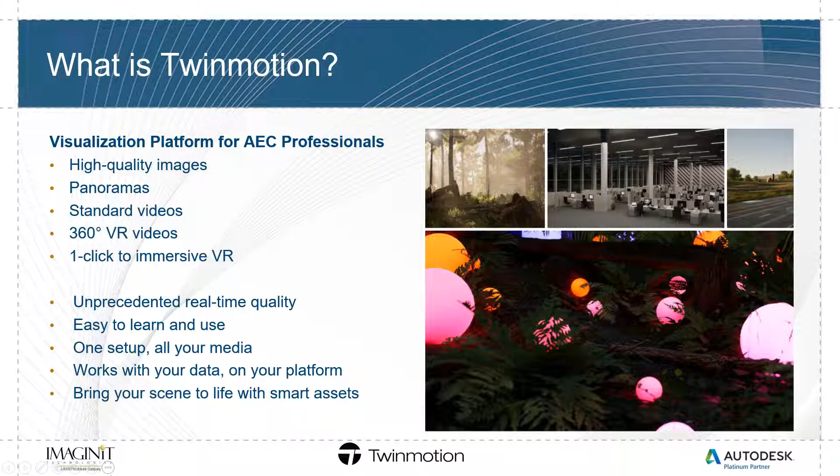The asset library already in Twinmotion is relatively substantial, but you're not limited to just the ones included. You can import and expand the library with a variety of other web-based resources to fulfill your asset needs. Finally, Twinmotion is actually quite fun to use. Once you start getting into it, you'll find yourself experimenting with a lot of different features because of how easy it is to use. So once I get into it, you'll see what I'm talking about. Since we have an open mic, please stop me at any time, and we have the time to make this more interactive as a demonstration.

Before I actually start doing the demonstration, let me show you a quick video that our team put together that encapsulates a lot of the features packed inside of Twinmotion.

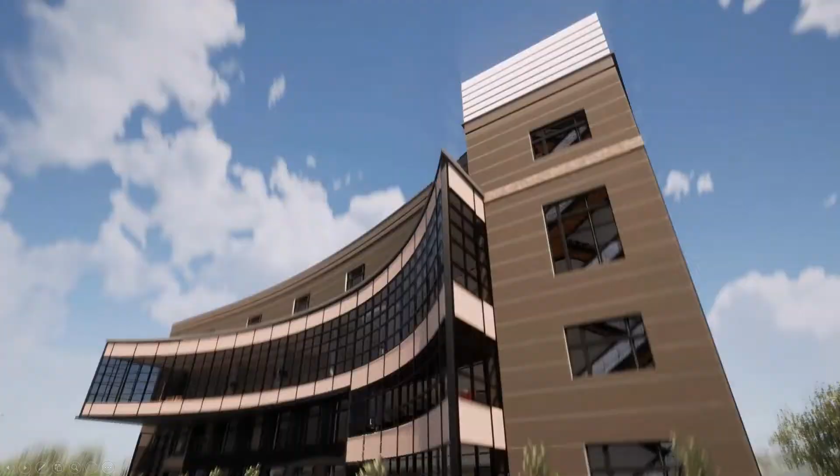This is the data set I'm going to use as a backdrop for the presentation. Again, very easy to use. We can have animated characters here; there's an extensive library of characters, not just people, but animals and a variety of other animated features. Camera capabilities are pretty standard, with panning and zooming. We have time of day settings where we can go from day to night, and there are a lot of lighting features here—you can see in a parking lot and around the building, with many lighting objects included in the package.

Some of the fun things you can see here: as we pan, we have what's called the northing offset, so you can change the northing offset and animate the moon and sun going across the sky. As we translate and move into the interior of the building, you'll see other features like particle animation—you can add smoke to this burning laptop. There's also water, character paths so we can add paths for not only characters but vehicles and custom paths, and we can integrate videos within the video—another neat feature.

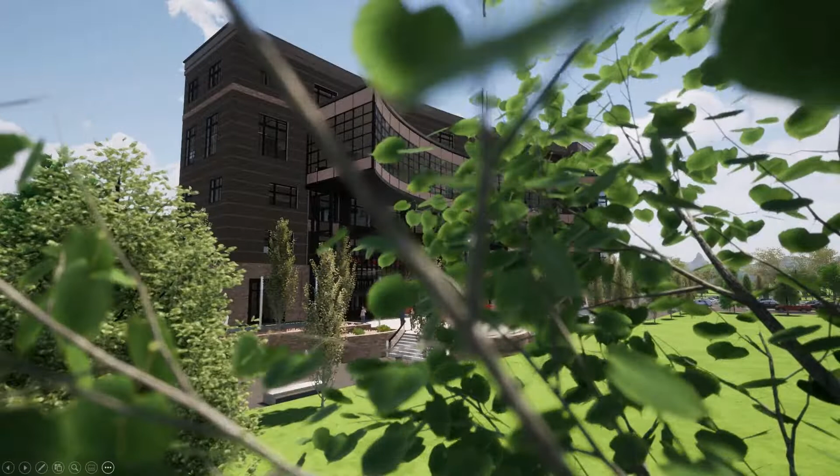And there are camera features here too, like depth of field, where we can change the focal point, open up the iris, and focus in on different things. And then, as I talked about earlier, there's vehicle paths. You can create your own custom paths and change the seasons from summer, to fall, to winter.

We can also adjust weather from a stormy, rainy day to a snowy blizzard day. As things get snowy, cars accumulate snow, and we can show the age and growth of plants and such on the site.

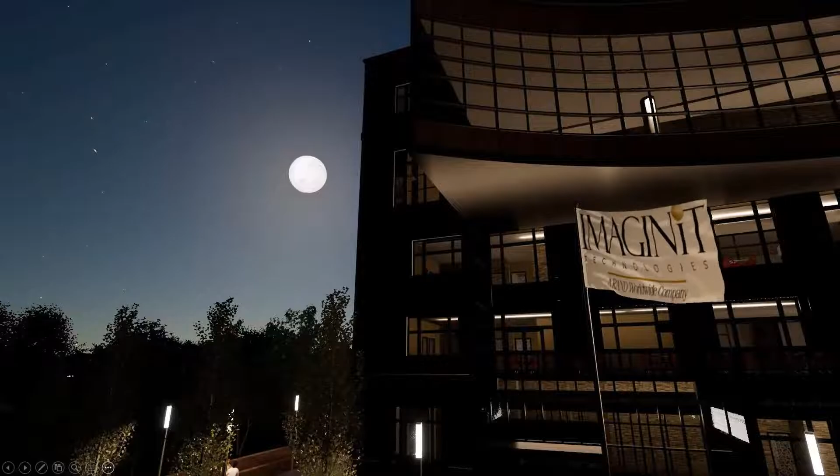Night scenes again have some more characters in there with flying birds, plus nighttime scenes with lights. So again, this just gives you a broad stroke view of what we can do inside of Twinmotion.

So let me get out of this PowerPoint for a moment, and let's start from the beginning of opening up a Revit file. This is a Revit users group, so you're all familiar with Revit. I have the model we're using as the backdrop for the Twinmotion presentation.

Again, you get to see it's a pretty basic model here. It's fairly well vetted out with interior information, building skin, and a little bit of a simple site.

But the way we were able to extract this data out of Revit and bring it into Twinmotion is using a plugin from Twinmotion. If you look at your tabs at the top, there's a Twinmotion plugin for the various versions. I happen to be using 2020. I don't know how far back they go, maybe 18, 19, 20, and then there's a 21 version of the plugin.

But it's a very simple interface, with three panel buttons. There's a 'See in Twinmotion' option, which is basically a direct link to Twinmotion, so I can quickly take this model and export it right into Twinmotion very quickly.

The difference between that and doing a hard export to an FBX file, which is this button here, is that it's a one-directional way of looking at your model and vetting it out inside Twinmotion to get a sense of what your model might look like.

So what I mean is I can be in Revit, export out into See in Twinmotion, look at the model and various views inside Twinmotion, make some adjustments back in Revit, and then re-export it back to Twinmotion. The only thing is that it's not a bi-directional change.

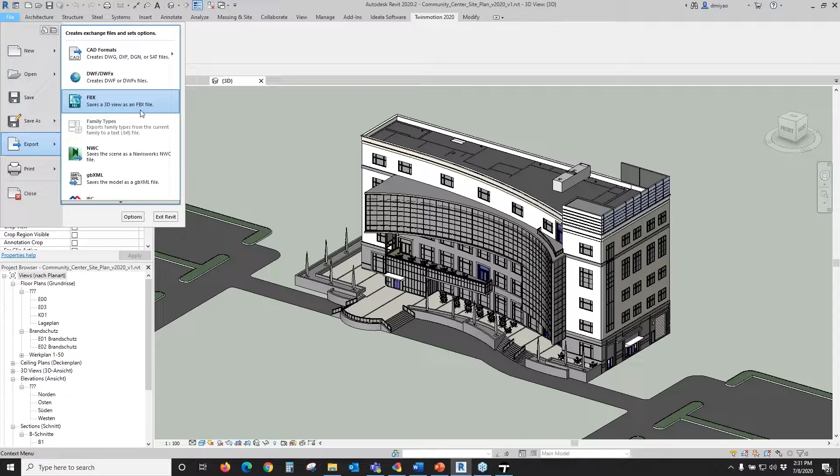If you're wanting to add certain assets, objects and materials, you can bring those in via FBX, and that's probably the cleanest method. Out of Revit, you can do a quick export to FBX, but it doesn't give you the broad spectrum of what you can do with the true export from the Twinmotion plugin. You can bring that FBX file right out of Revit into Twinmotion. It will behave similarly to the export out of Twinmotion, but it's just not as rich. To answer your question, yes, you can bring any FBX file into Twinmotion.

Upon deployment of Twinmotion, you're presented with this welcome screen. It gives you a quick overview of how to navigate around Twinmotion. You can change your navigation mode to mimic other applications, like the Revit interface, if you prefer, or just keep it at Twinmotion. There's also a link right here to the Twinmotion Epic Games website so you can download those plugins.

I'd caution about getting rid of this welcome screen, because if you set it to Revit navigation and then wanted to go back to Twinmotion, if you kill this box, I think you have to reinstall the program. It's a little annoying, but just a tip there. So let's move that out of the way.

I'm sorry, this is Jason Harwell. I don't mean to interrupt. Can you repeat that last little part there?

Yeah, about setting the controls for SketchUp versus Twinmotion. On the welcome screen, there's the ability to change your navigation mode to mimic Revit or SketchUp or whatever it might be. But if you kill the box and say you don't want it to pop up anymore, it'll stick on that format. It's not a game changer, but if you prefer to go back to the other navigation mode, you're kind of stuck there. You'd probably have to reinstall the program. You can't adjust that from preferences anywhere that I've found. I could be mistaken, but I'll shelve that for now. There's probably a way around it, but I generally just keep that there and quickly X out of it.

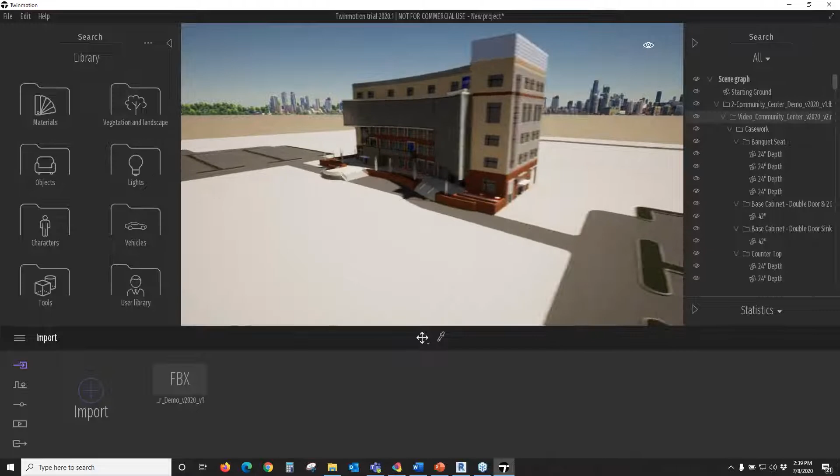If you look at it here, it's relatively raw - there's not a whole lot going on. The materials are pretty poor, but we'll get into those in just a minute. Navigating around the model is quite simple: I'm just holding my middle mouse button to pan around, I can use my wheel to zoom in, I can hold shift and orbit around things. And again, I can zoom in, or hit my arrow and start walking inside the model here a little bit and going around things.

And like I say, I actually wanted to go to a specific area in this model, but I could try to navigate through this and try to find it. But again, the easiest way for me to do this is to use my scene graph. I know there's a billiards table I want to go to, so if I just use my search, type in 'bill', select that, and hit my F key, it takes me right to that location. Pretty easy - I really like this scene graph because it allows me to navigate around my model quite easily.

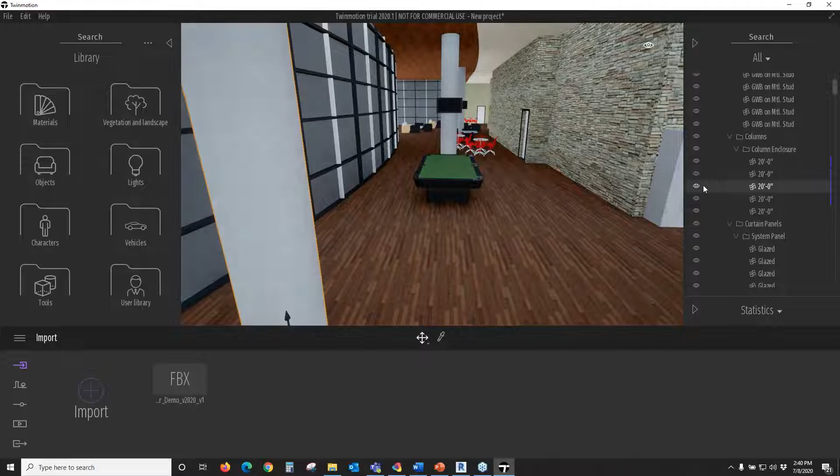That's awesome. Yeah, it's very easy to use. You don't even really need to know what the object is. If I just click on it, it'll tell me inside my scene graph that it's this 20-foot column, and I can turn that off right here. So again, it's just like object styles or layers. You can turn things on and off, but it's also a quick way to navigate inside your model, move to certain things.

So that kind of scene graph you were calling it, does that work in a hierarchy, and where's it pulling that information? Is it the Revit category, Revit type, and then family, and then instance? Yes. So these are all the various levels, and it's working exactly the same as Navisworks.

It's good and bad in that it's very deep because there's a lot of stuff in here. But the good news is that I can search, or I can look at things by various categories here, and I'll show you this as we go deeper into the demo. It doesn't matter where I'm at in my scene graph, I can always find stuff. Yeah, the search is critical and great. Oh yeah, thank you, this is wonderful, I'm using it all the time.

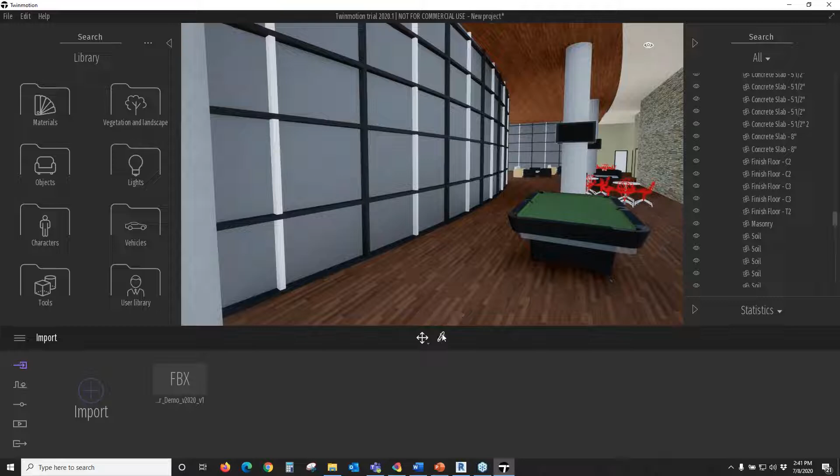So I'm inside the scene here, and one of the first things I want to do is show you how to manipulate and change materials. You can see that the materials brought in from Revit are okay, not terrible, but I'd like to change them, especially this window. If I hit my little eyedropper here, it's my material picker, and I click on it, it tells me it's this glass, cast gray, and tells me certain parameters about it. I can change its color, its reflectivity, its scale, and so on. But I don't want that, so I'm going to go to my materials library and select a different kind of glass.

This is the default library that comes inside of Twinmotion. Again, you're not married to this, you can add to it and manipulate any one of these materials on your own. Out of the box it's quite extensive and pretty deep. You can see all the various glass types in here, a lot have little bump maps on them, and some are shaded. I'm going to try to find this tinted, dark tinted glass.

I'm going to select that one and drag it on top of that material. So it's that easy to change that material from gray to something better - now it's an actual glass. Now that it's on my windows, I have control over changing it, so maybe I want it a little darker and more opaque. There's certain options here - this weather one is kind of cool, it'll show raindrops on your window if you have weather on. I'll show you weather when we go outside later. So again, very easy to add materials to the window.

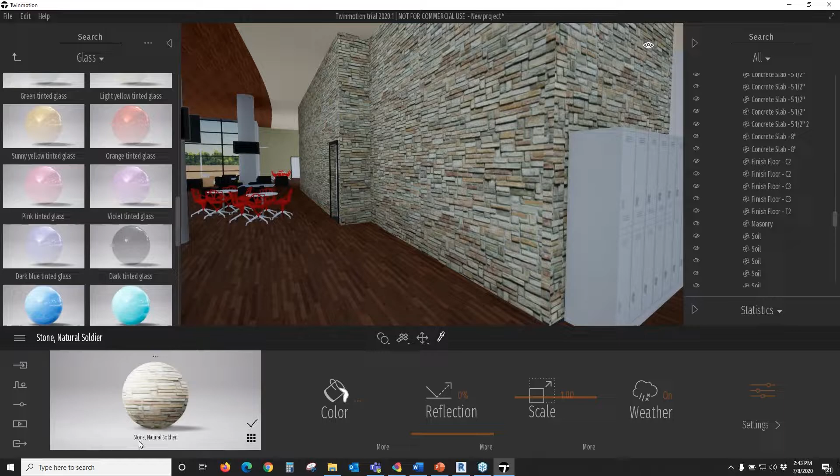If I pan over to this wall here, again this is the Revit material that was applied. It's not terribly bad, but I think we can do better - you can see it's pretty flat, it doesn't show any kind of bumping material. So let's change that. Let me use my material picker again, select the material, and it tells me it's this stone, natural soldier. Let me go back and find a different stone.

Again, pretty extensive library of stuff here. Maybe this one - I'll drag that on, so I put that stone on here. If you look at it, it's a little nicer now, you can see the relief in the grout from the stone. You can change the scale, make it bigger or smaller. Quite simple - just dragging that material onto that surface makes it that easy.

One of the things I really like about Twinmotion is that I can isolate the application of the material, even though this is one common wall type. I know a lot of times you're stuck applying a material to a certain wall type because it is categorized by that.

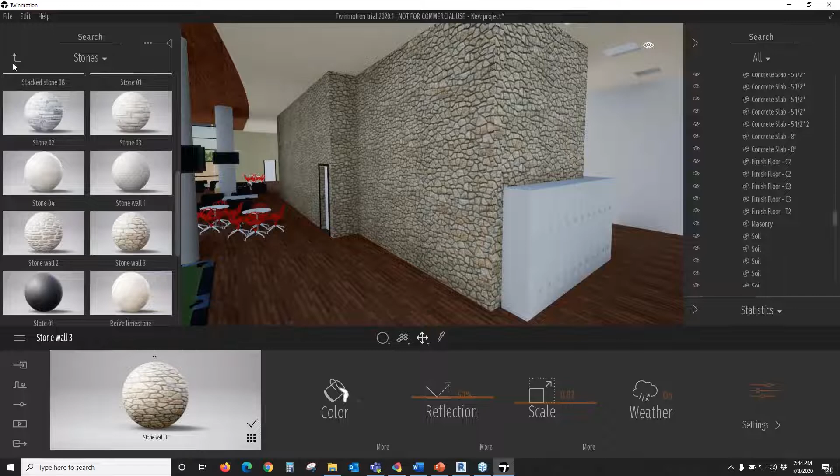I can isolate a piece of that wall by using apply to object. So if I want to change a piece of that wall to something else, let me find a different wall covering, maybe this plaster coating. I can just drag it onto that one wall now, so it's not changing the material for all objects of the same type. I can isolate that one wall and place that material just on this one wall here.

I find that to be quite useful because I know previously on other apps, you're always having to change its layer, its object style, and it becomes a little bit annoying to isolate certain things, when it's just easy right here. I can just pick that object and change it, making it different than the rest.

Pretty easy here. Some of the other things we can do with materials inside of Twinmotion: you can manipulate its color, maybe make it a little darker, change its reflectivity, adjust its scale, make it a little bigger, and the bump map.

But one of the fun things Twinmotion provides is this concept of grunge. If I go to more, you can see this grunge tool here. As I move the grunge up, you start seeing that the material begins to weather or look a little older, adding more realism by showing what it might look like in 10 years.

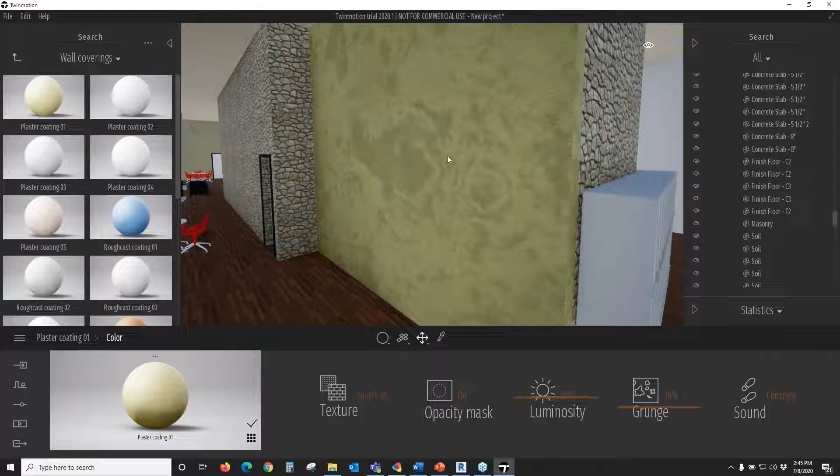These are the kinds of things you can animate too, so you can show how this might look in X amount of years, the weathering of this particular material. It's just a neat, fun tool to have for your materials.

So now that we have some materials applied, you kind of get the idea there. It's pretty simple, and I can start building out this environment a little bit deeper.

So if I go into my library... it looks like it wrapped around the corner a little bit. Is that something you can control?

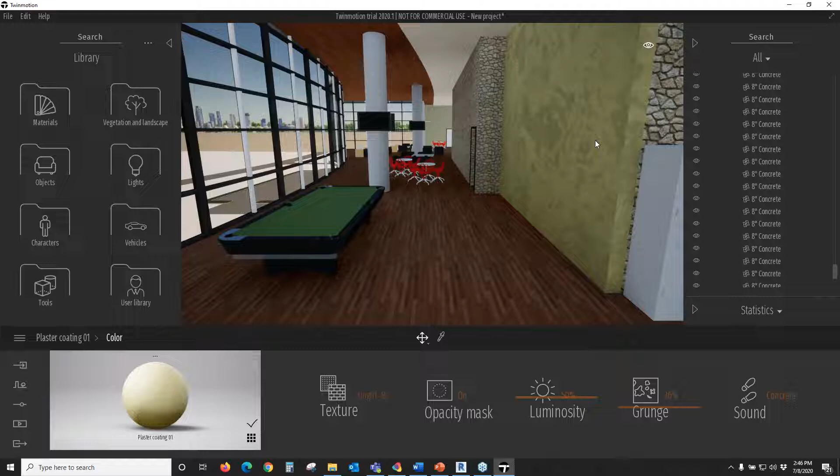Right here, this corner here. Well, it just happens to be the extent of that object, it's kind of a thick object. I could put the same material on this wall and it will blend. Is that what you're asking? I can't control it directly; it depends on the way the object is joined in Revit, like if you did a miter join there. Right, so this happens to be just a butt joint, so it's based on the geometry. You're correct.

Can you talk a little bit about the opacity mask feature, you don't necessarily have to demo it, just talk about how it works? What we'd see is another image mapped on top of it that we can set the opacity of. Yeah, absolutely, and I can show you there are other tools where you can set the sort order and place things on top of one another, I'll show you that in just a minute. But before that, I just want to build this scene out a bit further.

So if we go back to the library, I talked about characters. There's a fairly extensive character library here: animated humans, groups of people, posed humans which are basically like RPC people that are two-dimensional, and we have animals and some cutouts as well. In the animated human library, there's a plethora of different people you can select and choose.

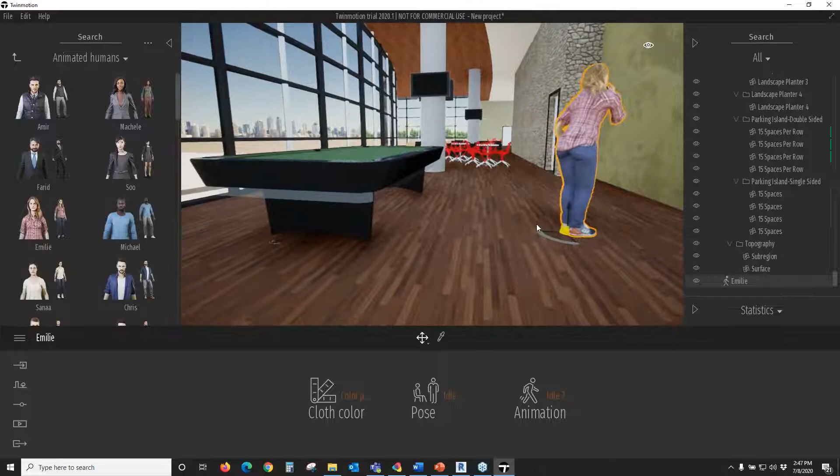If I want to build out my scene, I just grab Emilie here and drop her into the scene. When she's in the scene, you have this little gizmo attached to her so I can grab her and rotate her around, maybe move her over a little bit. They're animated too, so I can change her from idle to maybe drinking, maybe phoning, something like that. There's a variety of things you can do with each of these people, and they're all kind of random.

So I'm going to leave Emilie here for now. Move her out of the way.

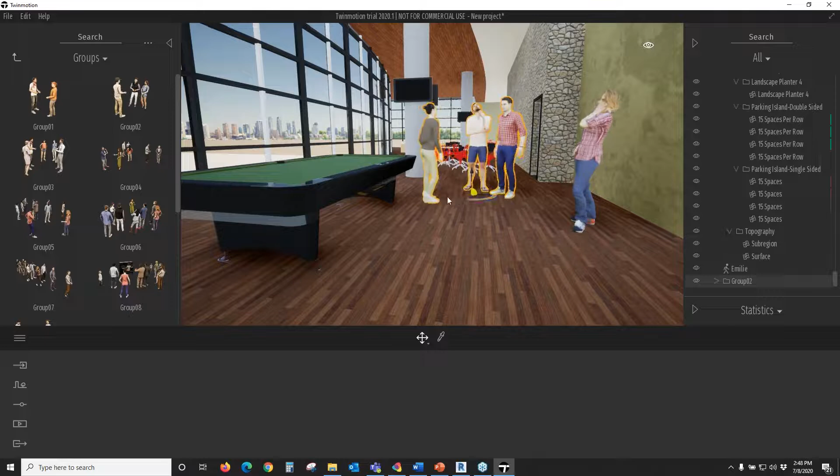Not only can you have individuals, you can start populating with a variety of different individual people here. I can put in groups of people as well. If I grab this group of 3 and drag them in, I'll place that group here, maybe rotate them a little bit. So you can see I have this group of 3. If I grab another group of 3 and place them here, you can see it randomizes it—it's not the same group of 3. That's a nice feature, because you don't want the same group of 3 people in your scene all the time. Every time you grab a variety of these groups, it randomizes them and puts a bunch of different people in your scene for you. So it's pretty simple to build out your scene by grabbing these various groups and people.

Not only do you have people, but we have animals. I like Felix because I'm a cat person, so I'm going to put Felix underneath the pool table. We've got dogs and chickens and all kinds of crazy stuff out here. Put a dog in here—maybe there's an office dog. Move him out of the way.

Again, like I said earlier, the product is very fun to use. There are a lot of interesting things you can do to build out your scene. There are butterflies—I showed you in the video. There are birds flying in the sky. There are fish you can add to a pond or water if you need to. So a lot of fun features here.

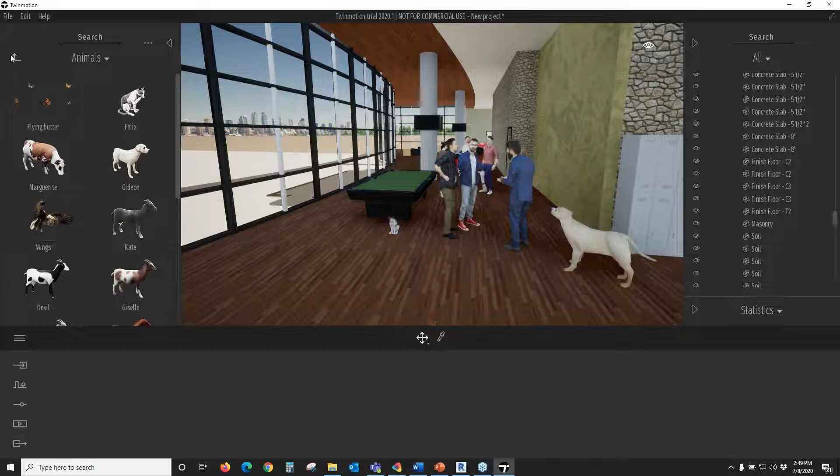I talked earlier about how you can kind of mask things on one another. Twinmotion has these decals, and I'll show you how to do some of these things outside, but I'll grab some fun ones here. Maybe I'll put this hopscotch decal on the floor here. Just like a material, I can change its size, I can change its opacity—maybe you can see through it. There are things you can do about that. This sort order will come in handy when I put something outside; it's basically about laying one on top of another, so you can sort them by priority.

I can also grab maybe this graffiti here. Again, as I'm hovering over any of these surfaces, you can see that it places it out there for you. A question about the decals?

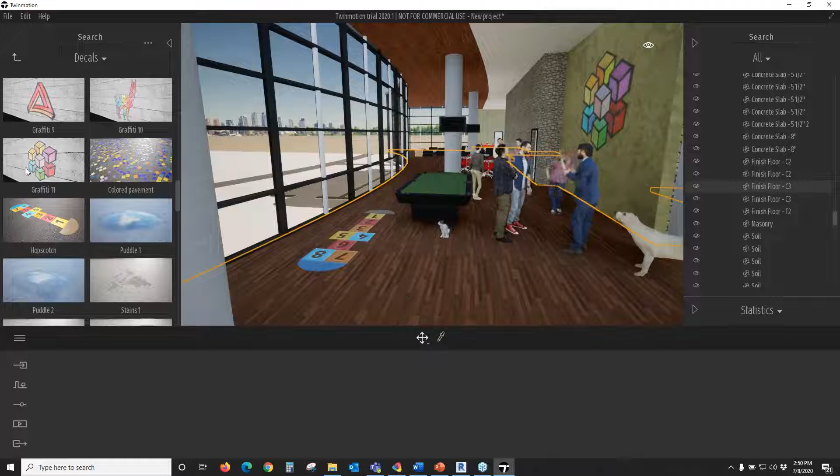Do those only apply to flat surfaces? Nope, I can put it around that round column. It kind of truncates it a little bit, but it doesn't have to be flat. Yeah, it does a little strange thing here—it didn't really wrap it, it just kind of placed it on the base of that round surface. It looks like it's on a per-polygon or per-face basis. Yeah, it's kind of a yes/no answer.

So decals are very handy because rather than building out a lot of geometry—I'll show you in a parking lot—you can do the parking striping. You could do that in Revit, or you can do it here as well. It really depends on how you want to manage your model and how you want to animate that. So decals are pretty simple: just like any other object or material, you can control them, changing its opacity. You can layer them on top of one another, and you can change its sort order.

Do all of these things you're adding, like decals and character animations, show up in your search, or what did you call this thing on the right here? Yeah, so if I go to decals, as I place them out there, it'll tell me I can now manipulate my hopscotch. So anything I add as an asset to my scene gets added to my scene graph, and this is how I can actually turn these things off—it can be placed there, but I can turn it off and on. So it's easy to manage those objects inside Twinmotion.

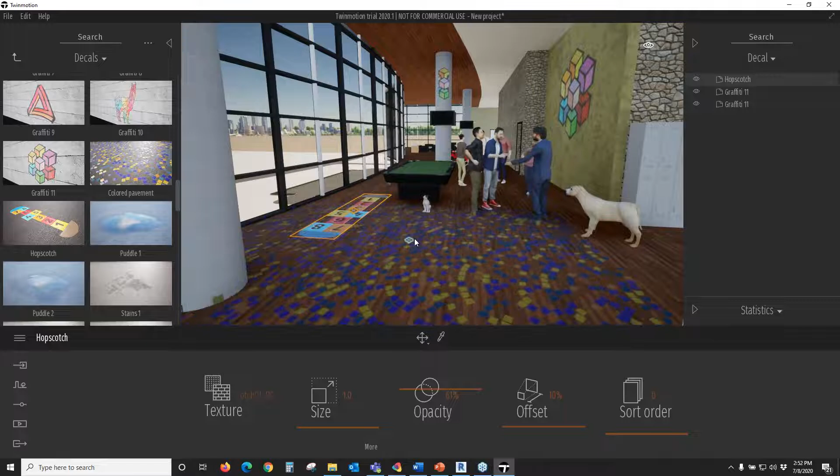How do we adjust the stacking order of those decals again? So in this hopscotch, there's a sort order. I'll show you when I go outside. I'm going to place some things outside, and I'll show you how that lays on top of one another. I'm going to grab this funky colored pavement. You can see that it's below the hopscotch decal, but if I change its sort order to 1, it moves on top. So you can change that sort order.

Oh shoot, I didn't mean to do that. Deleted my floor. Maybe it's better to do it here. Delete. See how easy that scene graph comes in handy? And by the way, there is an undo, so you can undo if you did something by mistake, like I did by deleting the floor. How many steps of undo do we get by default, and can that be changed? I think it's to your last save. So if I save this now, it's going to refresh it all.

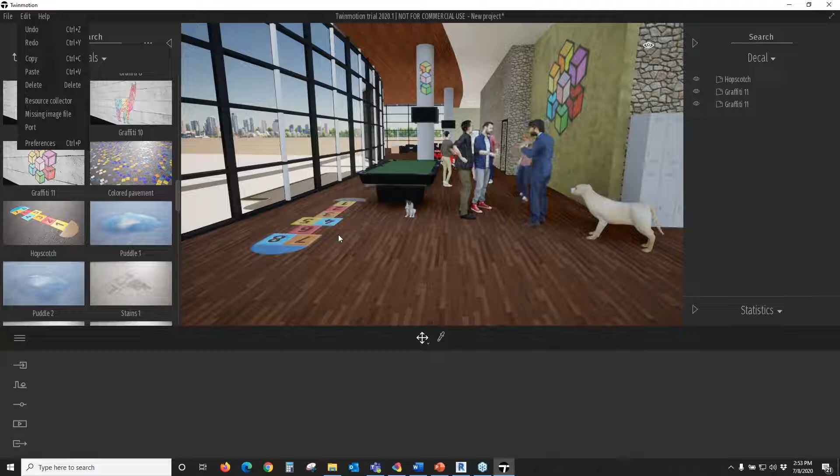Okay, so moving along here. So we have objects, we have decals, we have people, we have animals. We can also add other things here. Let's go to, maybe I can put a laptop out here. In the video you saw that. So we have a laptop here.

There are things like I showed you in the video that are particles. So there's a variety of different things here. There's fire and smoke. You can put this smoke on this laptop so it's kind of burning. So there's a lot of particle kind of animations. There's water, there's colored smoke.

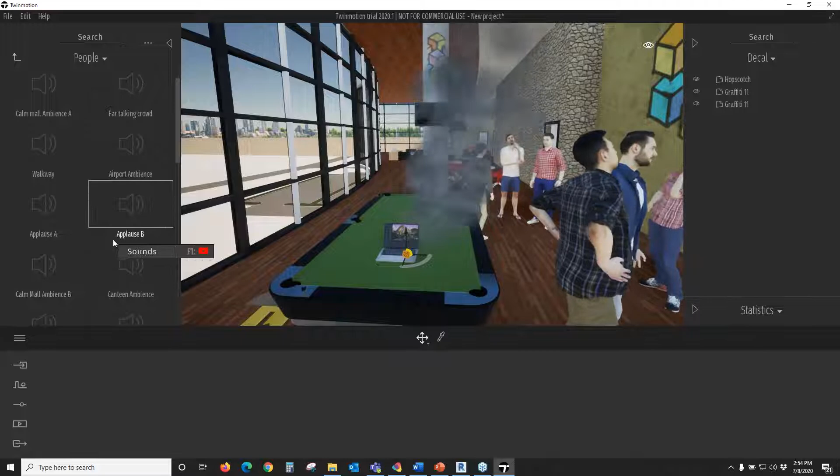Additionally, there's sound. So you can add people sound. You can't hear it here, but you can add certain kinds of sound, noises like these people are kind of conversing, so sort of like white noise in the background. So you can add a lot of texture to your presentation. That smoke is a particle, so that's a little annoying for me right now, so I'm just going to go ahead and turn it off.

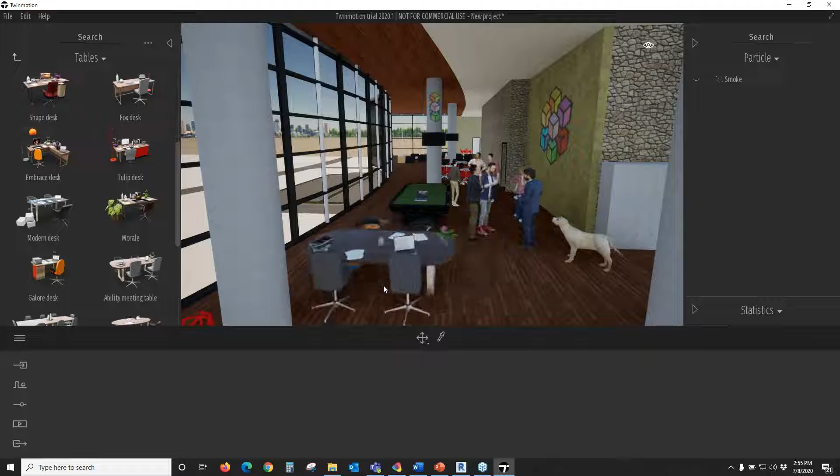Going back to some of the other objects that we can add in here. Let me go to Office and maybe some tables. So I can grab this table, I can bring it in. Again, it's very easy, it's just drag and drop into your scene, very simple.

Maybe I want to add a chair. So I grab this chair, drag it in here. In order for me to copy something, I have the gizmo again, I can rotate, move it to make a copy. I could certainly drop another chair in here, but I can copy this by holding my shift key down and dragging over. So now I have an instance or a copy of it.

Some of the other things that you can do with these objects is you can move things, you can scale, you can rotate by using these commands here rather than the gizmo. Additionally, there are things if you need to do something very precise, you can transform things.

So if I click, let me get out of this and go to all. So if I click on this chair, there are certain things about its position that it's telling me. If I wanted to precisely move something about this chair, maybe move that to 17, you can start nudging the object a little bit more precisely than eyeballing it, if that makes sense. So you have the ability to do some precision transforming of objects inside your model by using these tools here. Again, you can rotate and scale it here, they are the same features as here, and you can tumble through these by hitting your tab key. So if I'm hitting my tab key, I can tumble through these commands here.

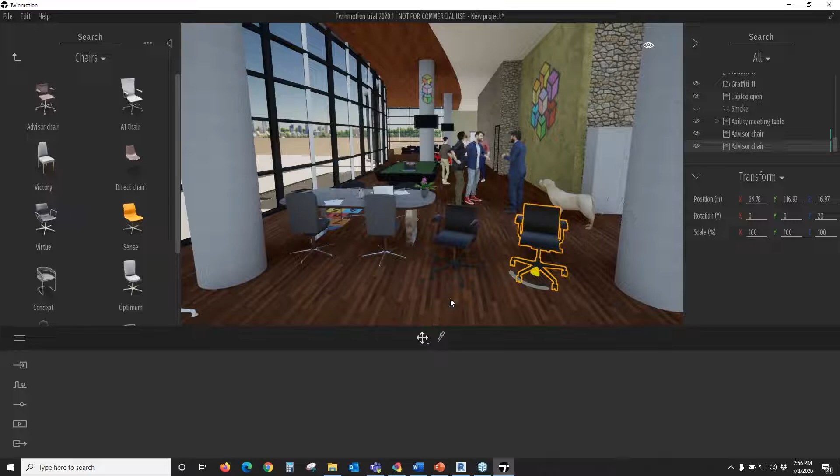Pretty simple there. Let's move on to some other things inside of Twinmotion. We have lighting. So in lighting, these are all these IES light types. Again, you can add whatever additional light types that you want, but I'm going to just grab one of these, maybe this one. So I'm going to just put it up here. And once it's placed, you have the ability to change its angle. Maybe I want it to be a little more focused, change its attenuation.

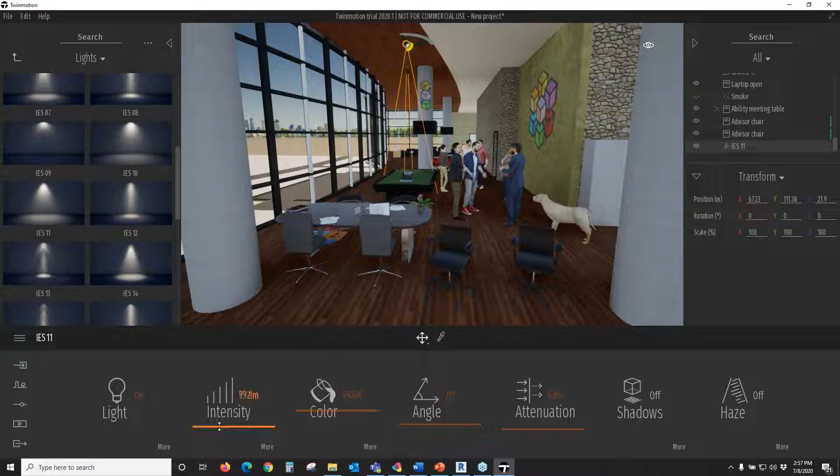Something like that, I don't know. Let me change its intensity and move this a little bit over here so it's on the pool table. You can kind of see that shining here. What really makes this come to life a little bit better is if I go to my little eyeball, I can change the time of day, maybe make this night. I can see that light kind of coming alive there a little bit. It's incredibly intense, but you can see how that adds a little bit more texture to your scene.

I can add another one here, change its angle and its attenuation, maybe something like that. Right now I have the shadows off, but I can turn the shadows on. You can kind of see the shadows now. If I go back to my lighting again, this is how I can filter what I want to see. You can see that the gizmo for this light is highlighted, but I can go back to the other one and change and turn its shadow on. So again, I have controls over here.

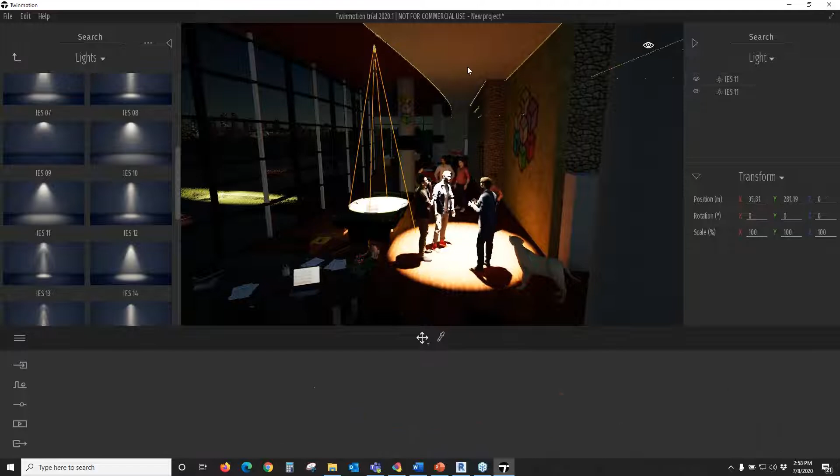So by the way, these gizmos, these helpers, gizmo helpers are important for you to manipulate and move the objects. I personally, when I'm working in my scene, don't like to see them, but I know I can always go back to them by just clicking on it and it highlights that object for me. But if you always like to have them on, you can go to your preferences and go to appearance, and they're called visual helpers. If I click on this and have visual helpers always on, they're always going to be on in your scene. Certainly it's a personal preference, but if you like to have them on at all times, you can. They don't render, but they're there for you so that when you're wanting to manipulate and edit these things, they're always here. For me, I just like to have them off because I know I can always go back to them from my scene graph.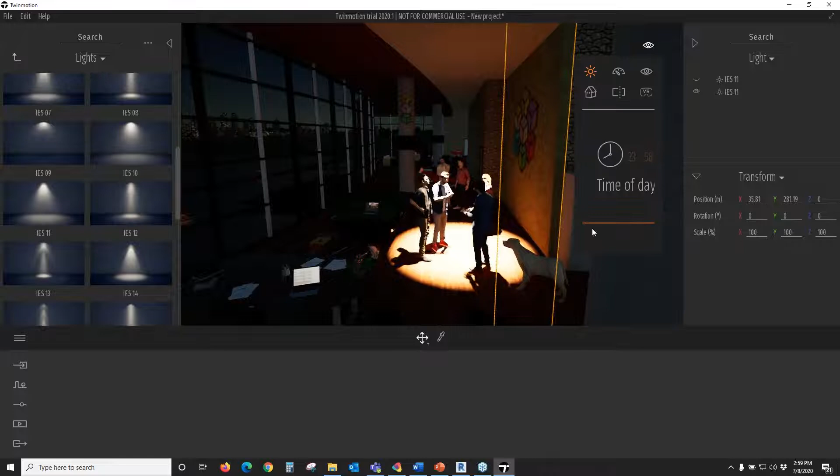Another way to get them back on is by hitting your G key. You hit your G key, they all kind of show up. So now I have the gizmos for all my objects in here. I can hit the G key again and they go away. So again, just as I showed you with how to import things, there are many ways that you can turn all your key features on and off very quickly. Let's turn this back to a little bit of time of day so we're a little brighter in here.

So I will pause here for a second. Any further questions?

This is Bethany. If we had a light that was in the Revit model, and if it had IES data in the light family, would it function the same way as these light objects that are added through Twinmotion, with all of these options that you're showing us, or do they have to be the Twinmotion lights to have all of those options? Yeah, unfortunately, they will not come over from Revit. So you'll have to add the light features from Twinmotion into those, even though you had an IES light from Revit. So you're going to actually have to add them in Twinmotion, unfortunately.

There are some other light objects that are loaded with the product. They're not as precise as these IES lights, but there are street lamps and various bollard lights. There's a library full of them. If I go to, oh gosh, like street lights, you can see there's a variety of different lights here, but they're not accurate lights, is what I'm saying. But yeah, to answer your question, no, those lights from Revit do not translate over to Twinmotion.

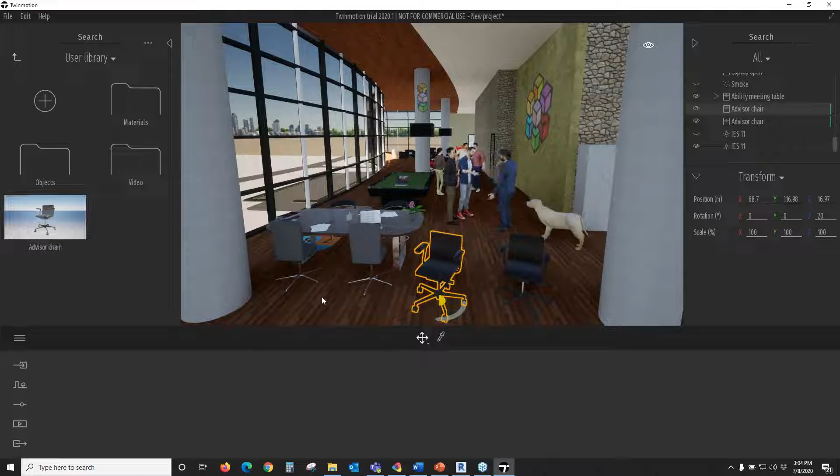Moving around the model, as I talked about earlier, is real simple. I can start walking through this - I'll turn my speed down to 1, which is walking mode. You can kind of walk through this and get a sense of your space. I'm just holding down my arrow key, and I have 1 selected. I'll put 2, you see it speeds up - that's called bicycle speed. So you can easily walk through your space and look at what's going on very fast. The walkthroughs in Twinmotion are pretty simple.

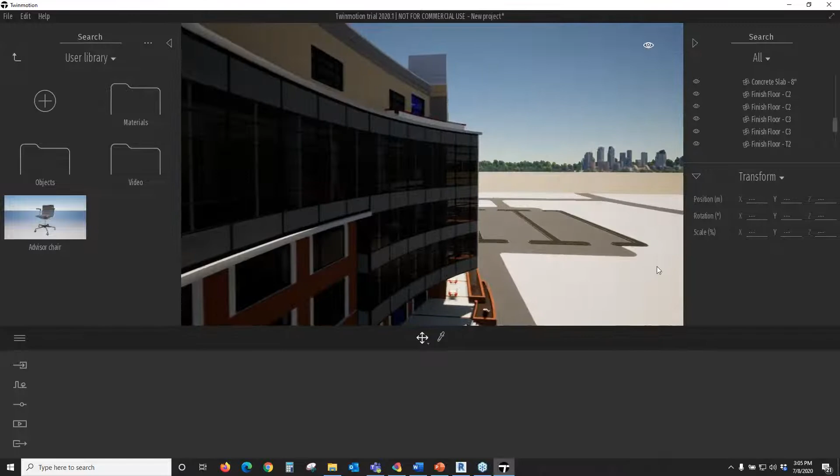So let's go outside and work on some of the stuff out here and show you some of the landscaping we can do. When I brought this model in, the exterior is pretty generic, pretty raw. These trees here, you can see, are RPC trees, so they don't come over very well. But what we can do very quickly is transform those into Twinmotion trees.

If I go ahead and select one, you can see it's this Italian cypress. What I want to do is grab all of them - just like anything else, you can hold shift and select to select all those trees. So I'm going to select all those, and I want to replace them. I'll go to my user library and pick some trees - I'm going to replace them with maybe this Lombardy. Now they're selected, I go ahead and replace. Pretty simple.

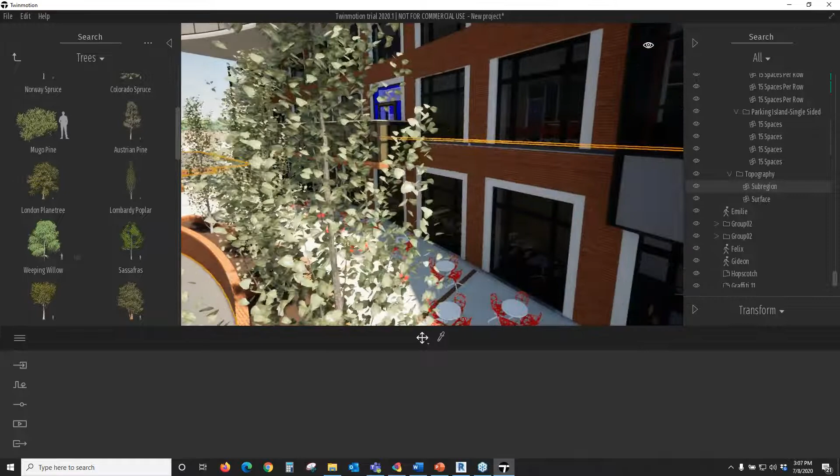So you can see that they're pretty big. I can change the age of those and bring them down to something a little more reasonable, and those look a whole lot nicer now. They're not the funky little RPC trees anymore - now they actually have leaves on them. And you can see if I add a little bit of wind, you can see them kind of fluttering there in the wind. So it's a much more realistic looking tree inside my scene here.

Some of the other tools that I have - let me move over to this planter bed and get in a little closer. Oftentimes I can just drag and drop trees into my scene like this. Pretty simple - I can do one by one, or grab a whole bunch and place them in there. One of the things we can do is what's called a vegetation scatter.

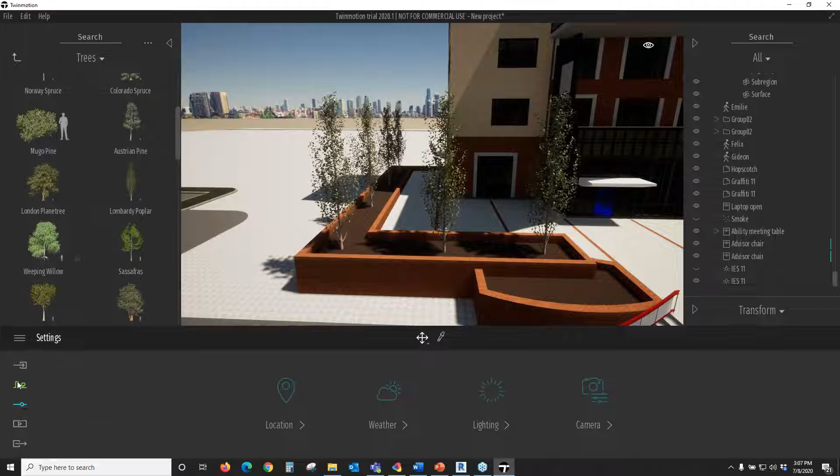So if I go here to vegetation scatter, I'm going to grab some vegetation - I'll grab this ling heather and put that into my drop area here. I'm going to select it and paint this object here. You can see how quickly that painted that object. It bled over a little bit just because of the scale of that object, but I can go in here and erase that. Let me make my eraser a little smaller, something like that. Now I can just hover over this and clean that up. But the idea here is I can quickly build out this flower bed by doing that vegetation scatter. It's pretty simple, pretty fast.

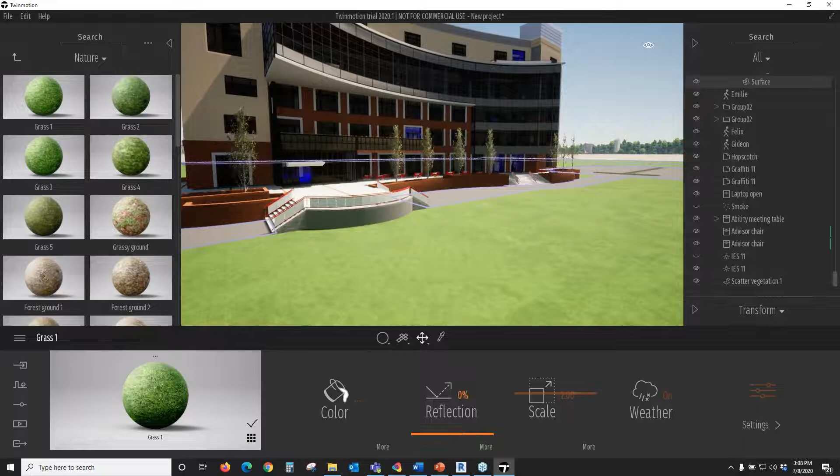One thing I truly don't like about this ground is that it's not very pleasing to look at, so I'm going to change that as well. I'll use my material picker, pick that material - it put in this funky little ground by default for whatever reason, but I'm going to put a ground covering, some grass. That feels a whole lot better now. It was that easy for me to change that grass. Again, just like any other material, I can change its scale and such, but I'll just leave it the way it is for now.

If I go back to dropping in some more trees here, I can just drag and drop. Every time I drag, the instance is slightly different, just like people - this tree is slightly different than this one. Again, one of the things we can do is change its age - maybe it's a very immature tree, something like that.

Question for you - I know in 3ds Max, when you're placing trees through that program, it has an option for a minimum and maximum age, so not only are you getting variation in the style, but you're also getting variation in height. Is there something like that here?

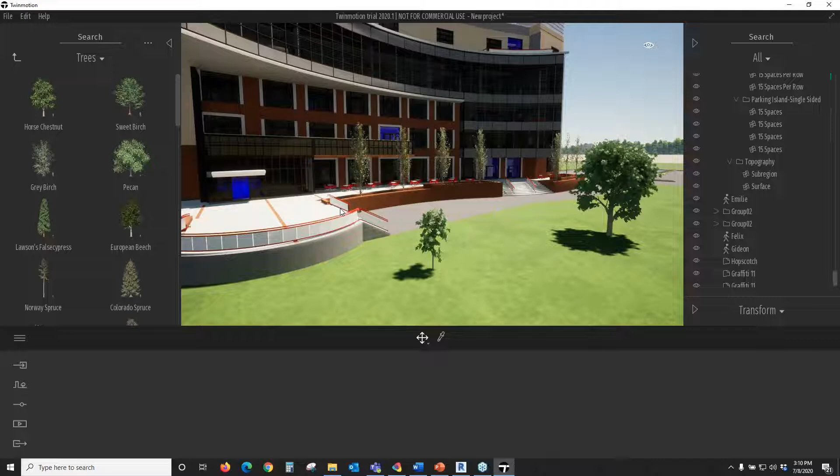I don't know if it's random - I can show you, actually it's a good segue into the next thing, which is I can paint the forestation of my site here. Just like people, it's random - the trees are not all uniform. So to answer your question, yeah, it does kind of randomly place trees at various stages of growth and size and things of that nature.

So let me show you that quickly. If I go to this vegetation paint, I'm going to grab a bunch of trees, different kinds of trees here, and just put them into my library. I'm dragging and dropping - I'm just putting them into my dock here.

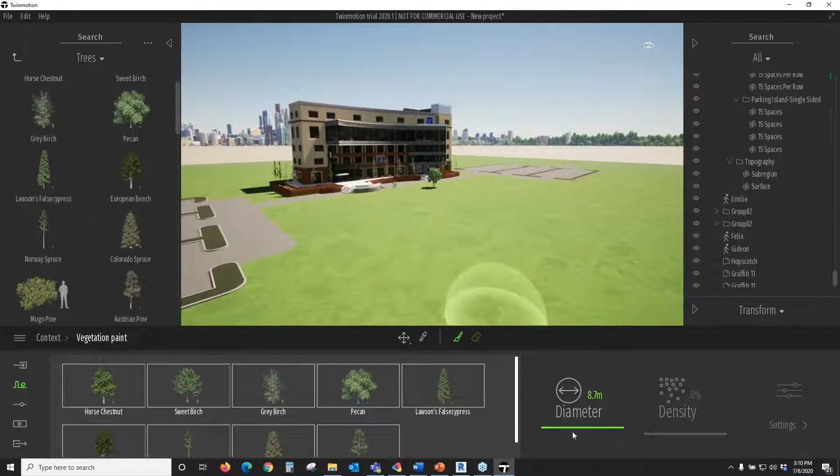Now what I want to do is paint. So when I get my paintbrush, you can see it here, and it kind of selected all the trees. But I'm going to make my bubble a little bit bigger, let me zoom out further, and make that even a little bigger. So now if I just paint in here...

It's just randomly placing all these different kinds of tree types that I've selected. I'm not having to manually select and pick what trees are going where - it's doing it for me. It's pretty cool, pretty easy. Rather than me dragging and dropping individual trees and changing its size, maybe I put another one here and change its size - it just does it automatically.

It's kind of randomly doing it on its own here. So, again, it's just a nice quick tool for me to add texture to this scene very quickly.

Looks like when you painted, that all shows up as one object. Yes, because it's this painted object. So it's good and bad—good because it segregates out these individual ones, but once I delete them, they're all gone, right?

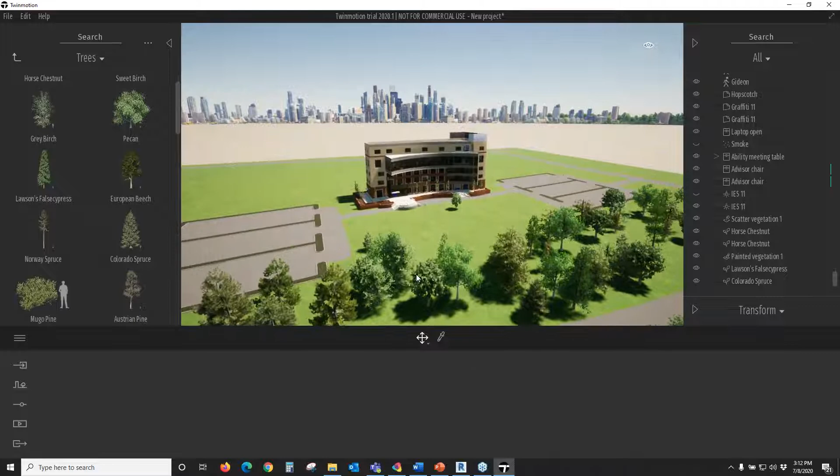Can you adjust the constraints on the randomness? I don't think so—it's just its own internal engine and how it's randomly placing those kinds of things out there.

Can you save where you put them down in the tray, like the collection of different ones you wanted it to randomly place around, so you could do the same collection again later? No, other than just clicking on it here—there's my selection, there's my tree set, and then I can start painting again. But if you deleted it, it would be gone.

Yeah, but I can come in here in this selection set. Let's see, hang on a second. Let me select this, and I can delete this tree from the selection set so that when I do an erase—or, let me take that back—I can remove that tree from the whole selection set.

So you can see now as I'm selecting these, they're removing from my painted selection set. And then I can add something back in, something different, and you can see that it's adding them back in again. So you do have control, as long as that painted selection set is still here, over removing certain trees and replacing them with others, because every time I select that painted tree object, it's going to give me what that selection set was.

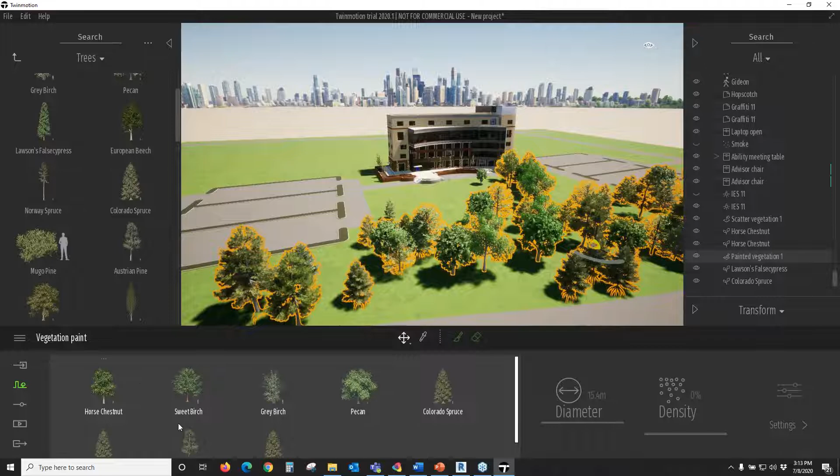So you do have control over it. Okay, thanks. And again, just like anything else in your scene graph, I can turn them off or turn them on—just like layers and object styles, you can control them.

As I talked about earlier, some of the things I don't particularly care about—I want to merge this into something a little bit more conducive to this site. So let me go back to my library and change the landscape to a flat grassy plain rather than this default brick. As that loads in, you can see it'll look a bit better because it'll get rid of this brownish gray.

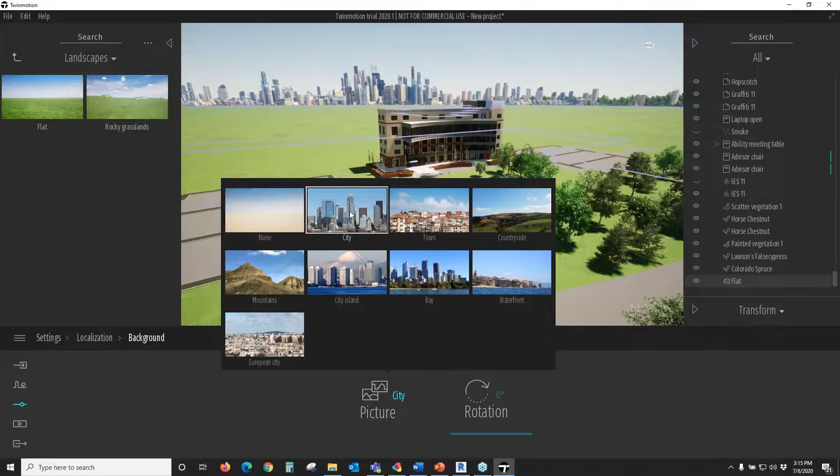Now it feels a little bit better—now I'm kind of in the wilderness a little, although I would like to change my background because it's the cityscape. I can change that by going into my background, and by default you're loaded with various types here. I'm going to select this mountain. So now I have a site that's a little bit more in context with what I want it to be—some mountains and a grassy plain area.

And also, let me go back—you can geographically pick a location anywhere in the world. If you wanted to be more or less, I'm out in the California area, you can select that as your geographical location, and it'll reflect a more accurate sun, time, and setting. So you can select your geographical location.

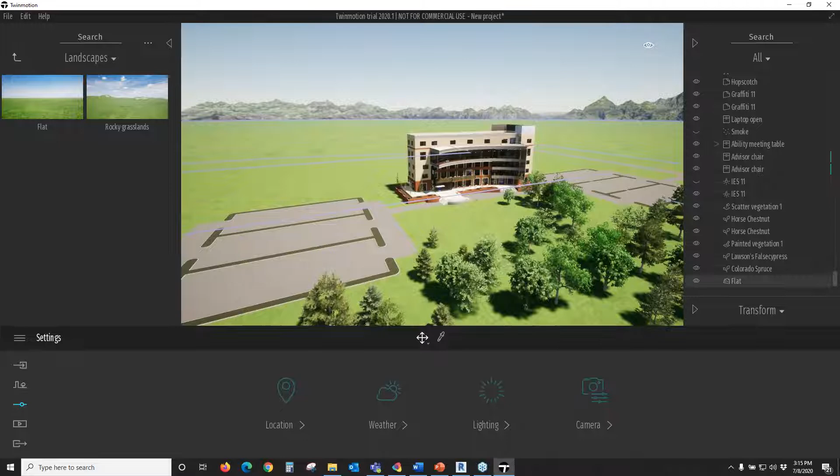Some of the other things we can do here—I wanted to show you that decal feature, which is kind of interesting. Let me zoom in a little closer. So, we talked about having that sort of feature—let me go back to decals, and let's put in this zebra crossing.

I don't know, and its size—something like that. And then let's also grab, oh where are that, one of these puddles, maybe this puddle here. And you can see as I'm dragging this puddle onto my scene, I really want that puddle to be on top, so I'm going to move its sort order up.

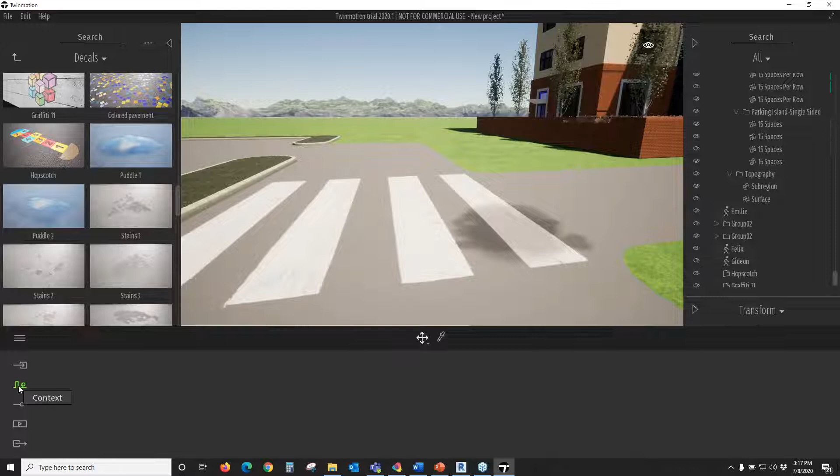So now it's sitting on top of the painted stripes here. And one of the interesting features about these decals is that if I were to change the weather here, let's change the weather to a rainy day.

You can see there's rain coming down. The material for this asphalt is what's called 'weathers on,' so it's showing some puddling. If I select this asphalt and turn weather off...

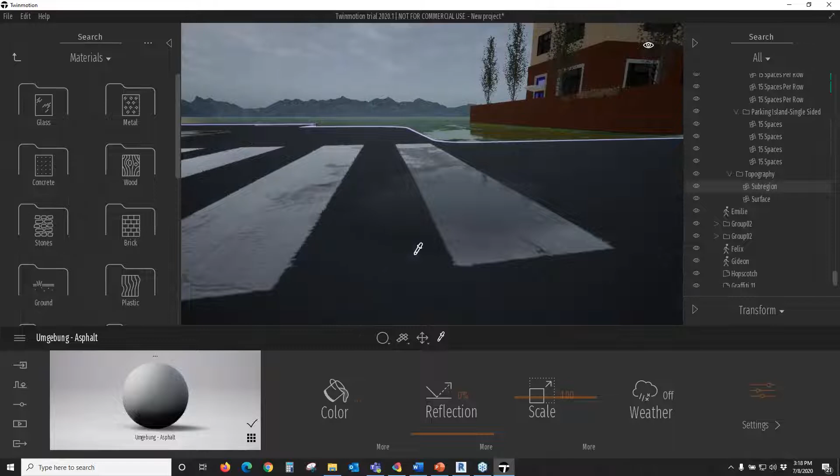You can see it doesn't show the puddling of water on the ground here. But even this puddle I placed inside the model shows the raindrops hitting it, so it's relatively realistic. I put that decal on top of this asphalt and walk stripe, and it's still showing the weathering of the puddle from raindrops falling on it. Very cool stuff.

So again, I can select that asphalt. Let's turn the weather back on, and now it kind of shows the water ponding and puddling on top of the asphalt surface there. Very cool stuff.

Back to weather, and then let's turn this on. That's a good segue into how you can change the weather here. I can go from a sunny day with no clouds, to a cloudy day, and then it gets a little darker, and then full on rainy day.

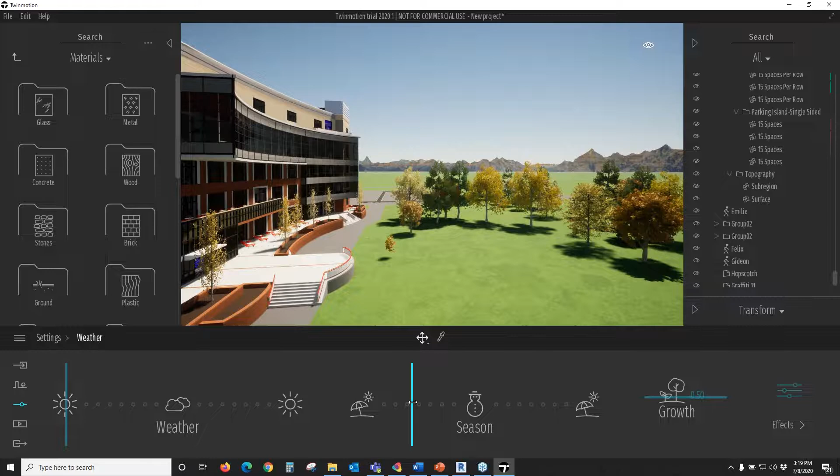Let's go over to the trees — this makes a little more sense when you can see them. I can also change the seasons here, so I can go from summer and gradually get into fall. You can see the colors on the trees change and get deeper into the season. And then I get into winter, and now there's snow on the ground, and the trees have lost their leaves if they're that type of tree.

As I change the weather, since it's winter, the rain turns to snow. What's cool is that even though I've got snow falling here, there are some effects I can add — I can add smog, and now it really starts to look like a blizzard.

By turning up that smog, you can see the background kind of gets faded out a little bit, and you can see the snowflakes falling. Lots of interesting effects you can add to your model very easily and quickly. Let me bring this back to a happy summertime.

Quick question for you — yeah. Just to touch back on placing vegetation and all the various effects achievable with it. We'll be working with landscape architecture clients who have very specific needs as far as species. Yep. I'm sure we can import custom species models, but to what extent will they be able to receive those effects and respond to wind?

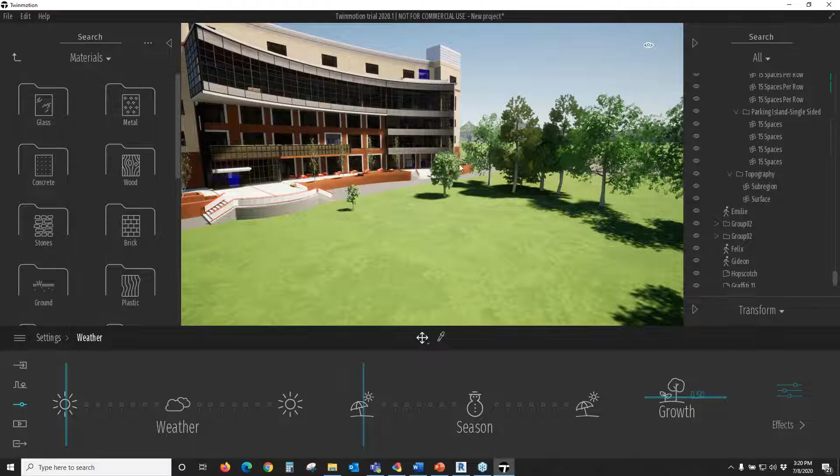They should respond exactly as these do, as long as they're brought in basically as an FBX file. Then you can add those assets just like I did to my custom library. Once you import that object, you can bring in trees from a resource — I forget the name, but I can get that for you. There are resources where you can bring in a whole bunch of different kinds of objects, and trees are one of them. You just bring them in as an FBX into the scene, and then I can save them off as my own individual assets, and they should behave just like these.

Are there any file parameters or special data settings we have to set up for our own custom tree models if we can't find the species in the libraries? I can send you a list of file types if that's helpful. Sure — if there are things you're doing outside of Revit, like Maya or 3D Studio Max. Typically the foundation is an FBX file, but there are other formats you can import. I can get you that list of file formats, no problem.

Okay, thanks. Quick question — with the weather and the wind, can that affect fabrics and the trees, and do the leaves blow in the wind and stuff? Oh yeah, in fact, while I'm there, I can show you.

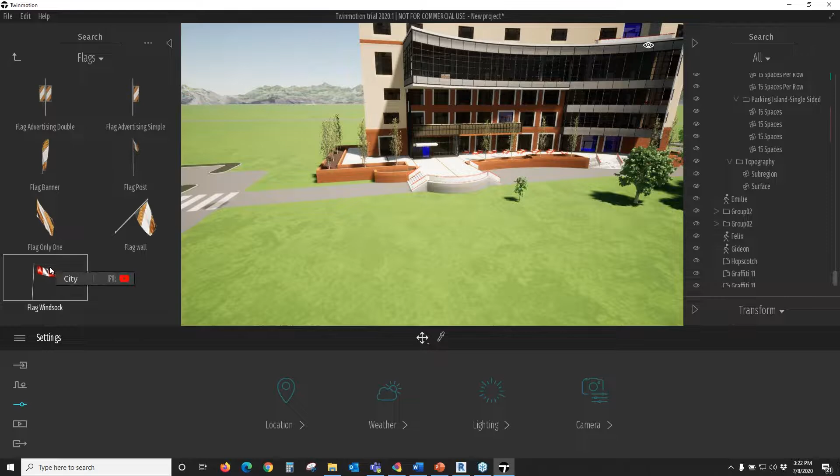Flags. Put this beast here. You can see it's kind of waffling in the wind there. And so let me show you how that affects things.

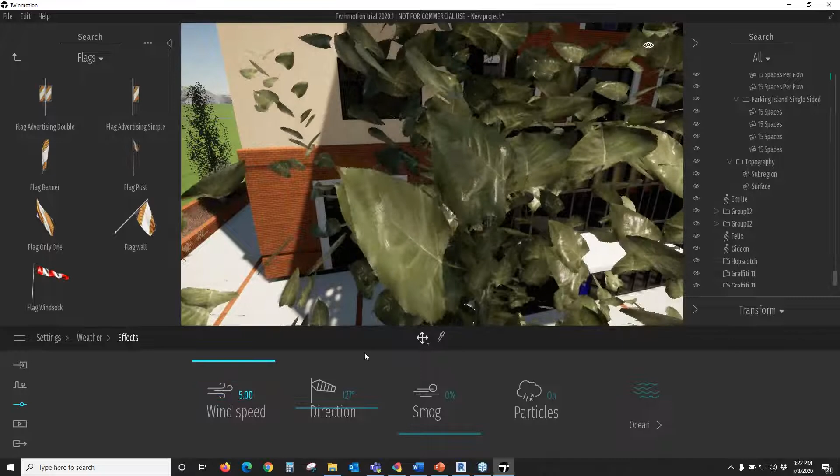So if I go to weather effects and wind speed, I turn that wind speed way up, maybe change its direction. Now you can see with the wind speed, with these leaves, it's impressive. I can bring that wind speed to zero and they don't move, or very, very light, just kind of waffling in the wind, or very busy. So the leaves, these flags, absolutely all are affected by these various effects. Smog, obviously if you have water features, there are things within water that we can do. The wind will affect how the water ripples across the water there.

So yeah, absolutely. Let me show you a couple other quick fun things that we can do in here.

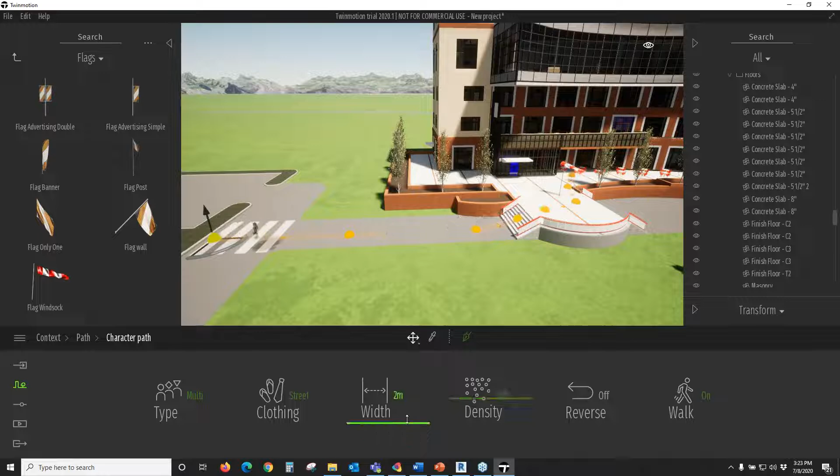One of the things that's kind of fun is what are called character paths or vehicle paths. So if I add a character path, I'm going to just add something randomly here of some characters walking to or from the building. So there's my character path, and you can start seeing people walking here. But maybe I'll change its density up a little bit more, and then change its width. What I can do here is maybe I'll be down here, and you can see people very happy because they're leaving work.

I can reverse that. Maybe they're going into work now, they're sad. We can certainly add these character paths. Like I said, these are all animatable, so that in your animation, as these people are walking in and out, you can show egress of certain buildings, exit paths. You can show all that kind of fun stuff using these character paths.

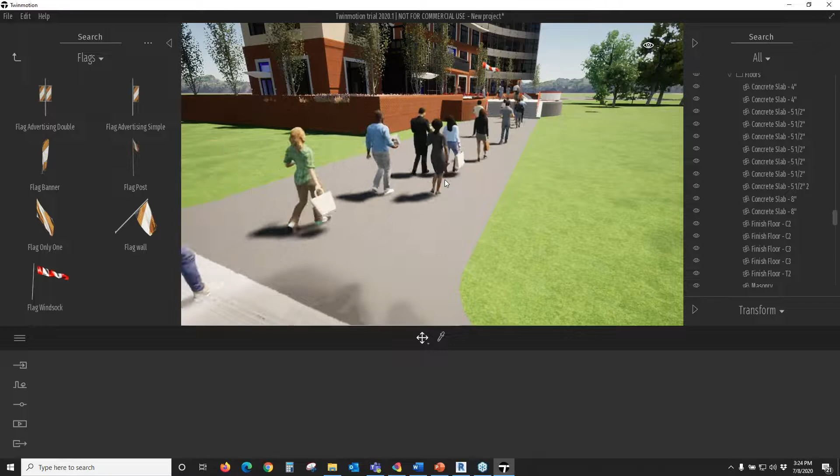You can use custom paths. You can animate, there are vehicle paths here as well. There's bike path, and then there's these custom paths. You can add your own kind of funky things if you want to animate certain things, but vehicle paths, as you saw in the animation, as cars are coming and going. So very, very fun kind of stuff that you can do here.

Very quickly, one of the nice features about Twinmotion is, just like websites, you can bookmark things or scenes inside of your model here. So let me go back to that billiards table, for instance. I'm going to go back here, hit my F key. So I'm back to this billiards table location where I was building stuff out. If this was something that I wanted to bookmark as a placeholder, where I want to keep going back to for whatever reason, it's something that's important to me.

I can come to my media command here and go to image and save that as an image. Not only is this an image that I can render, but this is basically a bookmark. So if I'm back out here and fussing with other things, let me get out of media mode, and I'm doing other things outside, I can always go to this scene very quickly. So it acts like a bookmark, but it's also an image that you can use when you're ready to go out and export this image as a still.

Very, very easy for you to bookmark certain areas within your model. Rather than trying to get—I use this billiards table as sort of my point of reference inside the model, I can easily navigate to it. But you can also save it, as I just showed you, as an image, and save a variety of these bookmarks so that you can navigate your model very, very quickly.

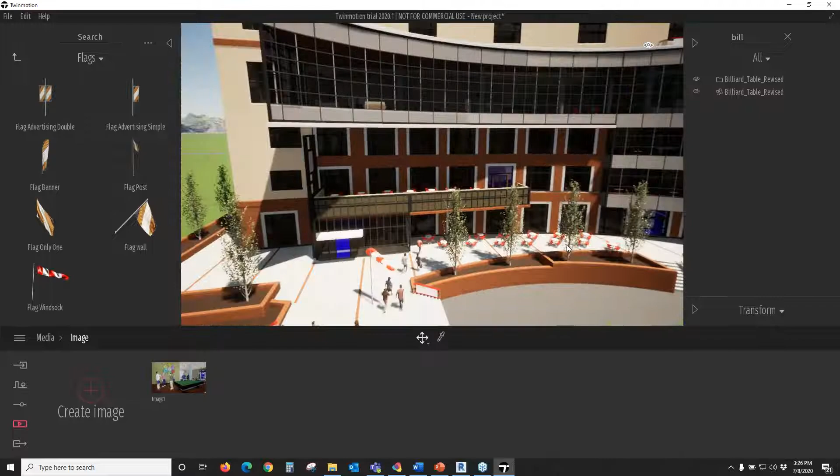With that said, I can create animations very easily as well. It's really quite simple. So if I'm essentially maybe down here looking at the building, and I want to go to my video, I'm going to create a video. This is actually my first keyframe. So I'm going to navigate maybe over here, and another keyframe, and then my third keyframe, I'm going to look up here.

Something like that, and then add my third keyframe. So now I've created an animation, that's how fast it is. Granted, this is pretty simplistic, but you can see it's so fast for me to create something to share with a client or customer.

I can easily create these images, like I did as bookmarks, or create a quick animation and export them very quickly. The animation I showed you at the beginning of the presentation was like a 2.5-minute video that was fairly well vetted out with a lot going on. Now I'm just using a laptop, not a high-end one, not a bad one either. I'll show you the specs in a minute, but that probably took me 30 minutes to render that whole 2.5-minute video.

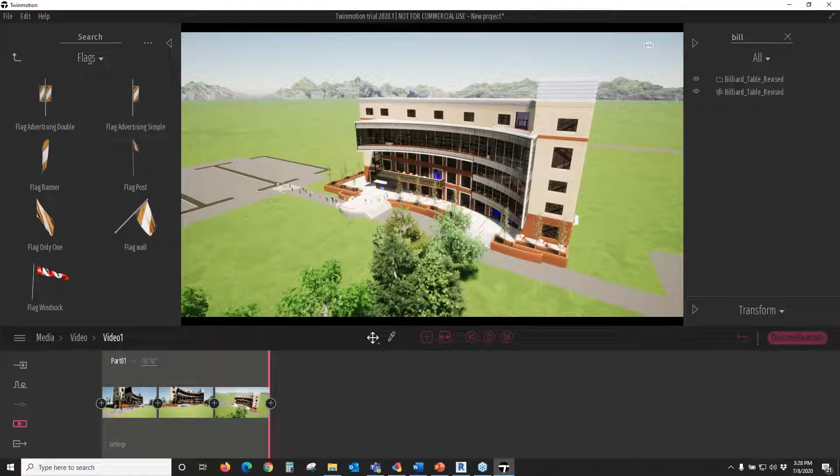So it's very easy for me to create these animations and images very quickly.

One of the other things I talked about earlier was this concept of presenter mode. I'll show you a finished presenter mode, but basically it gives you a way to share this information with a client or customer who doesn't have Twinmotion. It takes this model, any images or videos you've produced, and packages it into one huge executable file that you can share with a customer, and they can look at this model as if they had Twinmotion.

That is a very nice feature, and it's full VR too. So if they have VR appliances, they can plug them in and use it as if they were walking through the model with their VR tools.

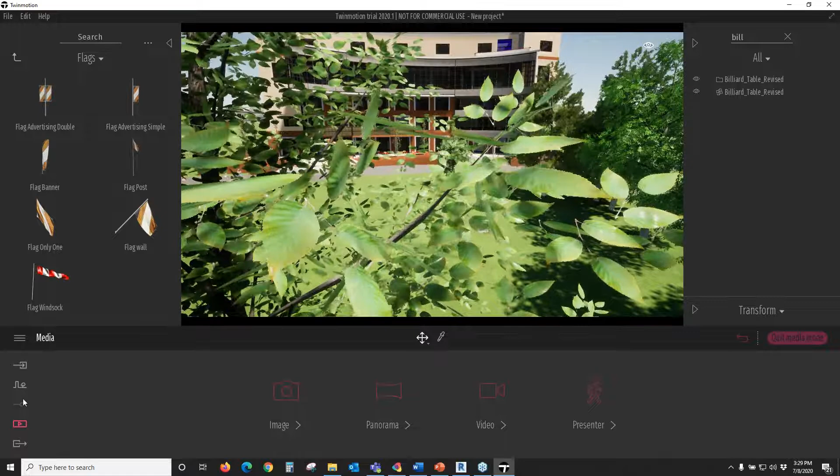So very, very easy. One last thing, maybe if I can, I showed you guys in the video. Let me see if I can navigate a little cleaner here. Takes a little bit of fussing, but if I navigate into these leaves here, and let me get on this and go to - oh, by the way, I'll go back to that in a minute.

I have some camera settings here, and I showed you earlier that depth of field. So if I turn this on, I can mess with this a little bit and change the depth. You can now see these leaves in the foreground are out of focus, and the background is in focus. So there are a lot of nice camera tools here you can fuss with, like changing its aperture, maybe opening it up so everything's in focus.

And again, these are all animatable - again, there's my made-up word. But a lot of neat features here.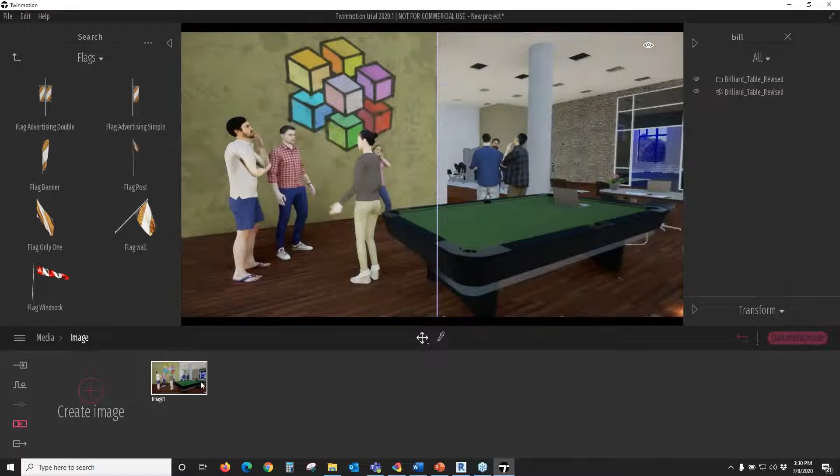What I wanted to speak about was these images here. You'll notice that as I click on the image, it goes into what's called a media mode. What that means is I can independently manipulate this scene outside of my standard scene graph. My scene graph controls its lighting, its time of day, or whatever. But if I select this individual image, I can change this independent of my master scene graph.

Something that's probably more relevant is maybe changing the... gosh, I am. Hang on, what am I doing here? I wanted to... I'm losing my mind here a little bit.

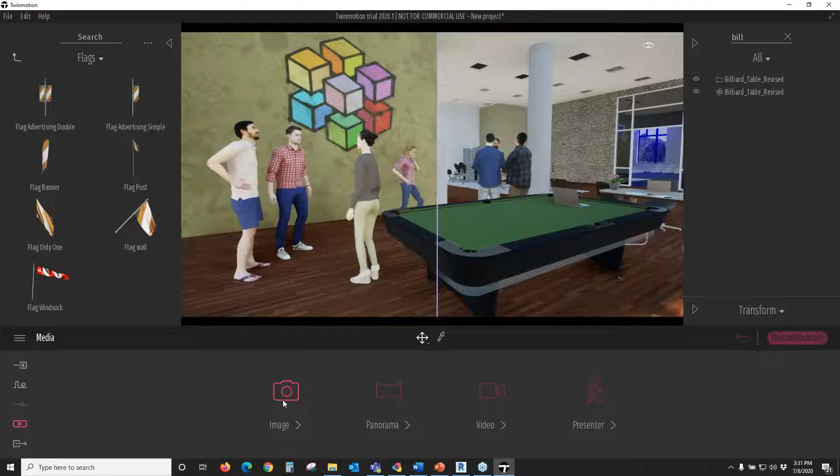But my point was that you can manipulate this image, change its settings, maybe its time of day, maybe give it some weather settings, and they are specific to this bookmark image, and it doesn't affect your master scene out here. So that's how you manipulate your videos and change going from night to day or from fall to winter, because you're changing these bookmarks as opposed to your master scene. So again, those are easily manipulatable, and you can fuss with those a little bit.

So that basically was a quick overview of how we can use Twinmotion. What I did want to show you very quickly was that presenter file. So let me get out of this. Unless, do you have any other questions before I exit out of this?

Actually, I do have one question.

If we wanted to bring in another file, like another FBX of a different building, or if we had a site model that was a separate file, and we wanted to basically put together multiple different files, how can we position them correctly, like in the world or relative to one another?

It's a tricky question. If you're using a bunch of linked Revit files, generally they're kind of superimposed on one another correctly. So if you bring in that one Revit file, like this file here is two files, it's the site plan with the models as a linked file, so they reference together perfectly inside of Twinmotion. But you can also bring them in independently, so you can bring in the shell of the building as one Revit file, and the MEP as a separate Revit file. But depending upon how they were composed in Revit, they should line up with one another once you bring them in as separate FBX files.

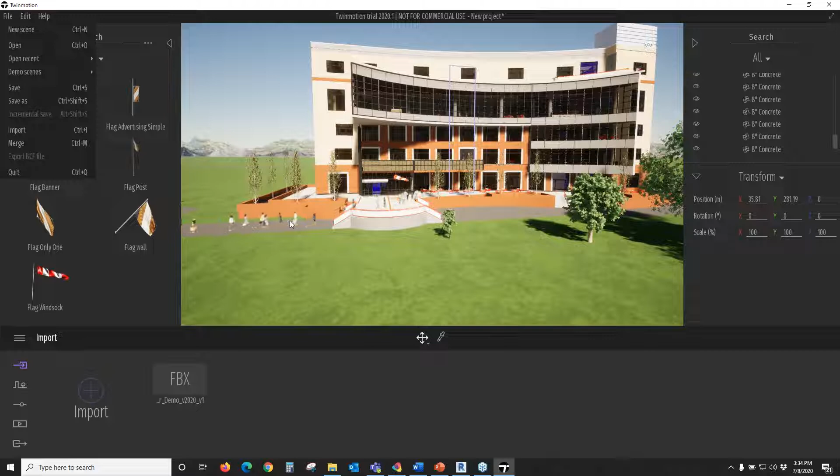For me, the best way is to just do it all in Revit, keep everything synchronized and linked, associated properly, and then bring it into Twinmotion. And it comes in very nicely. Like I say, I did all the manipulation of the building and the site inside of Revit, and then I brought it into Twinmotion. You definitely don't want to use this as your way of managing the files. You want to do that in Revit like you normally would, right? That's where everything is referenced properly, and then Twinmotion will bring those in very, very nice. So yeah, no problem there.

So let me get out of this and show you a couple other things. I don't know, are we on time, or are we okay for time right now? I'm assuming so. Yes, I believe so. People got to drop off, but yeah, keep going. Okay, let me just show.

I promised I'd show you Twinmotion and Presenter. So this is a Presenter file, the same model that we were just looking at, but packaged as a presenter file.

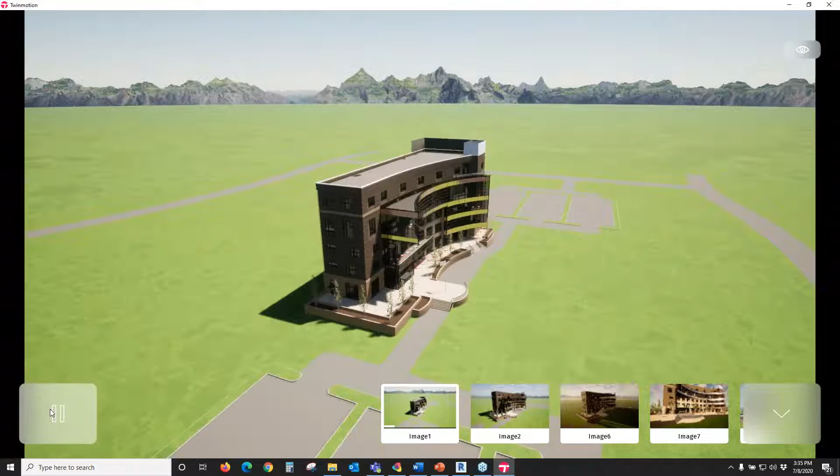This isn't overly extensive. This is a file that you can share with a customer. So if you were the architect working on this model and put together this presentation, what I did was save a couple images so you can run through these like an animation. So there's image 1, you can see it on your screen, it'll switch to image 2 and so forth, walking you through all the various images I've created here.

The nice thing about this, though, is that even though I've embedded these images, and you can have a video embedded here as well, this is the full breadth of the model I was working on. So I can start walking around this as if I own this model, start looking through it, walk inside of it, and start looking at certain things inside here.

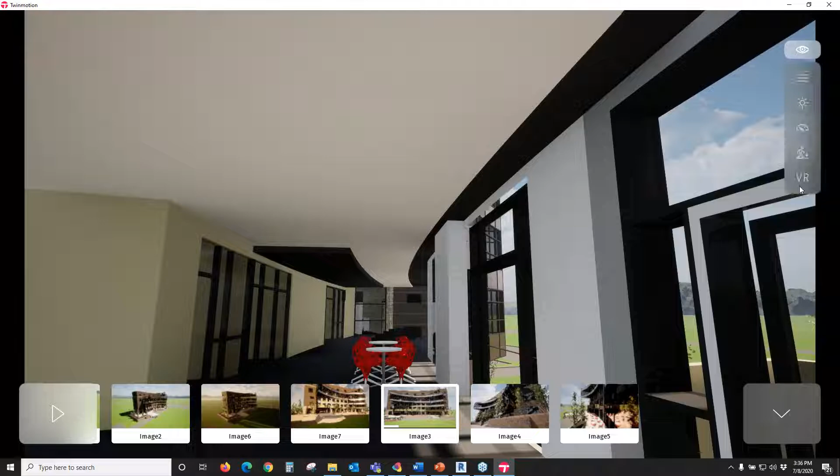So you can share this model with customers or clients or whomever. Now, granted, they can't change anything about it, and you probably don't want them to, because this is something you're sharing with them to say, here's what we're thinking, what do you think? So you'd have all the materials and everything set up, and they can walk around it and look at it. And like I said before, they can go full VR with this. So this is a nice way of packaging something for a customer or client, so they can study

the models or presentations that you have for them. Again, they can't change anything about the model, but they can look at the various images embedded in it, walk around this thing, and get a good sense of what that model is going to look like.

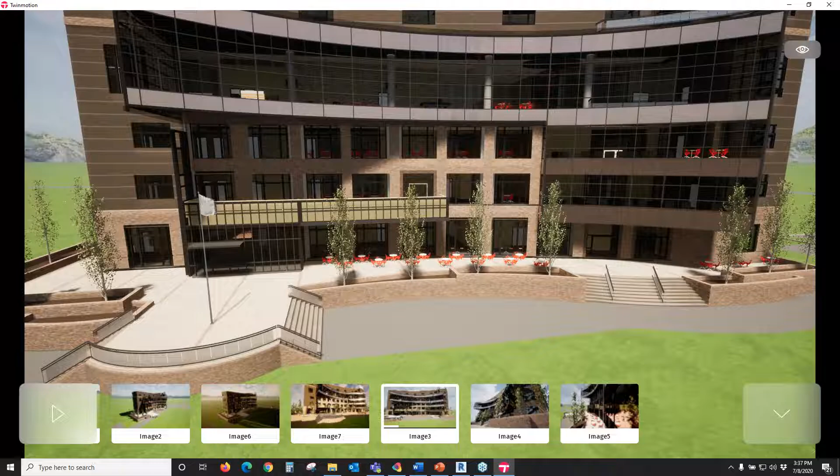Does this run entirely in software, or does the client need certain hardware specs to run a file like this? Well, it's GPU intensive, not so much CPU intensive. They may struggle with a computer that doesn't have much video RAM, but it's not like Twinmotion where you're massaging the model — you're giving them a standalone file to look at. Still, I'll show you my specs, but you can run this on a relatively weak laptop as well.

Is there a way to adjust the levels of detail when we export, to hit some lower system specs? Yeah, absolutely. You could change the resolution of how these things are exported as well.

There's one thing I didn't show you: Twinmotion actually determines your hardware and sets up the Twinmotion environment per your hardware spec. It's intelligent enough to know — if you've got a gaming computer, it'll set things at ultra high. But if you have an average laptop, it'll set the software up so it's not totally taxing your machine, and it'll still run. There's a setting inside Twinmotion where you can do that.

How does that affect file size with these different resolutions and stuff like that? I think it's relative — the higher the resolution, the bigger the file size is going to be.

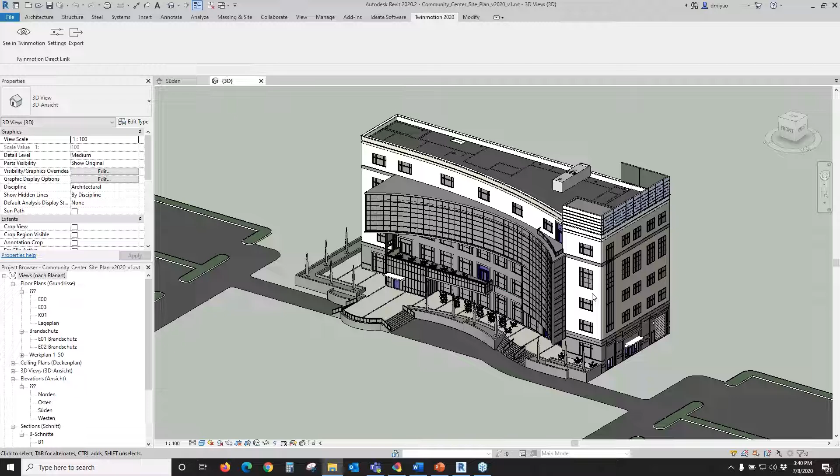I'm being completely honest with you — I don't want to lead you down the path and say this is going to work great, just put it up on 360 and it'll run flawlessly. But yeah, I would expect something like this to be a sizable file size.

One last thing I promised to show you is working with Sync in Twinmotion. Here's my Revit file — I have one linked Revit file, so the model of the buildings is actually linked to the site. If I'm working in my model, still fussing with it a little, and I want to see what this looks like in Twinmotion, it's very simple.

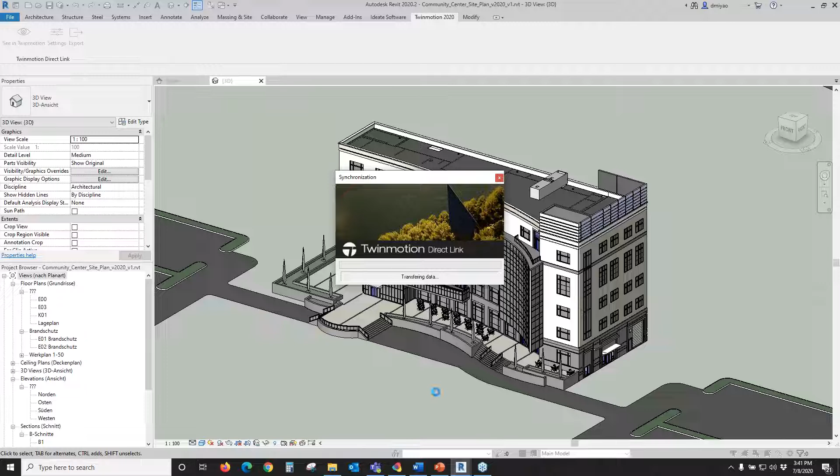I just click on Sync in Twinmotion, and it will open up Twinmotion in a new project. Here's my welcome screen again, and it'll just take a minute.

So here's my model, for instance. Let me fly into this very quickly. This was the model just brought in right out of Revit. By default, because of my settings, it automatically swapped out the RPC trees with Twinmotion trees. What you can do here, while sitting in Twinmotion looking at this model, is go back to Revit and maybe do something — I don't know if I can do this, let's see.

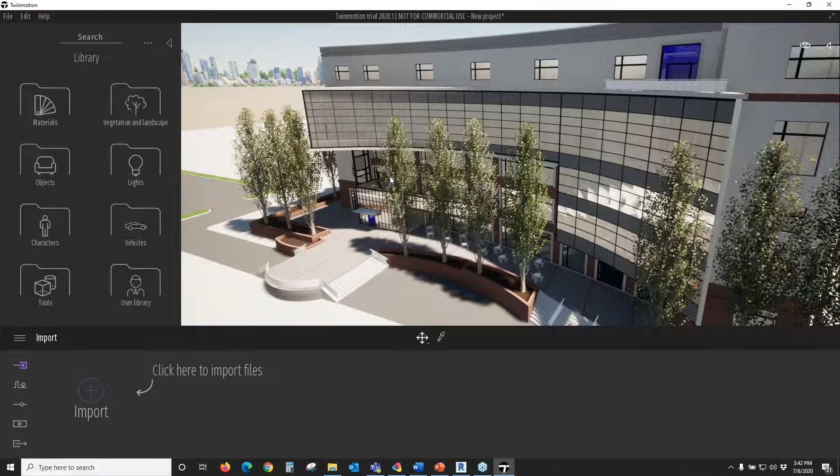I'm in the wrong model. What I want to show you is that I can manipulate this model, re-export back out to Twinmotion, and it will automatically update that change inside of here without fussing or re-exporting. I'm directly viewing this model in Twinmotion very quickly.

But that's basically how View in Twinmotion works. It's a good way, as you're working with your Revit model before you go to full export to FBX, to vet out your model and look at certain things to make sure everything's lining up the way you want it to. So that's the long and short of exporting it and seeing it in Twinmotion. It's very quick because it's a linked model.

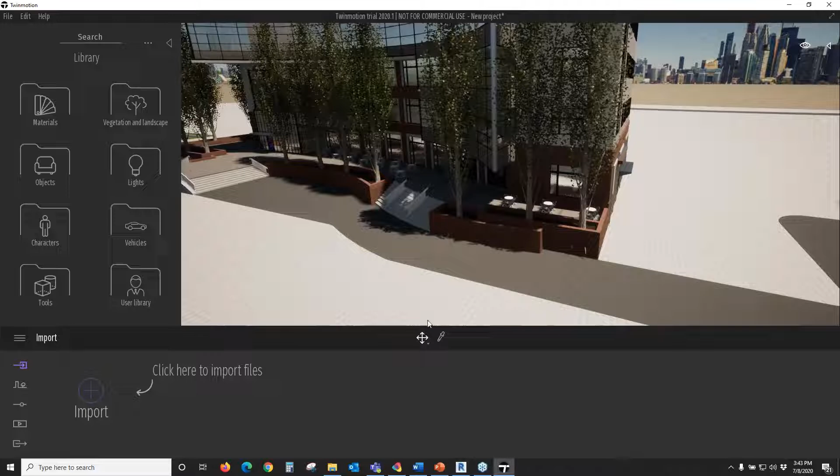So you're saying if you move a tree, it'll connect. Exactly. I can manipulate this model, re-export back out to Twinmotion, and it'll immediately show me that change here. And like I said at the beginning, the changes you do in Twinmotion do not go back to Revit. It's one direction.

Quick question, kind of tangentially about placing trees again. If we needed specific species for our trees but didn't want to get too deep into the nitty-gritty of making the models, can we place RPC trees in Twinmotion? Yeah, absolutely. Once you have whatever specialty trees you want, you can place them in.

Hey Dean, one of the things I think was mentioned regarding content was that there's a new partnership with Quixel. Yes, correct. And there's tons of content there, right? Oh, there's tons of material, a material library. In fact, there's a variety of other sites you can download from. Like for instance, about the trees, there's a library full of trees that you can import.

Let me just go back to this PowerPoint very quickly, because I think there are some additional points—we kind of walked through this already.

So basically it's a very easy product to use, as you saw. As you start touching the commands and playing with it, you're going to see that it's very easy to use. And as you get deeper into it, you're going to discover on your own the learning of what you're able to do. It's not like 3D Studio Max, which is very intense. You can produce renderings and animations very quickly, in the same day, without intensive training. So very easy to use.

So I think it was helpful that it was interactive, so I was able to answer questions as we were getting through things. Was there anything else, Matt, that I needed to share with the group?

Well, I just want to reiterate that it's a perpetual license, so if you purchase Twinmotion, it's a perpetual license. They can't turn it off like the new subscription model that Autodesk has, and you're going to get every update and release through the end of 2021, which is a good amount of time with no maintenance or subscription additional cost to stay current. And I know Twinmotion has a minimum of 3 point releases a year, and they're constantly updating this product.

Do they offer network licensing? Do we have to buy a seat for each person, or is there no way to buy like 5 seats and share it between a lot of people? No, it's a single user license, and each license is $224 - not $2,224, but $224. So most firms can afford to at least give the power users the ability to use the tool. That's a promotional price through the end of August, but it's quite the deal. Hopefully you can see how easy this is to use and ramp up very quickly.

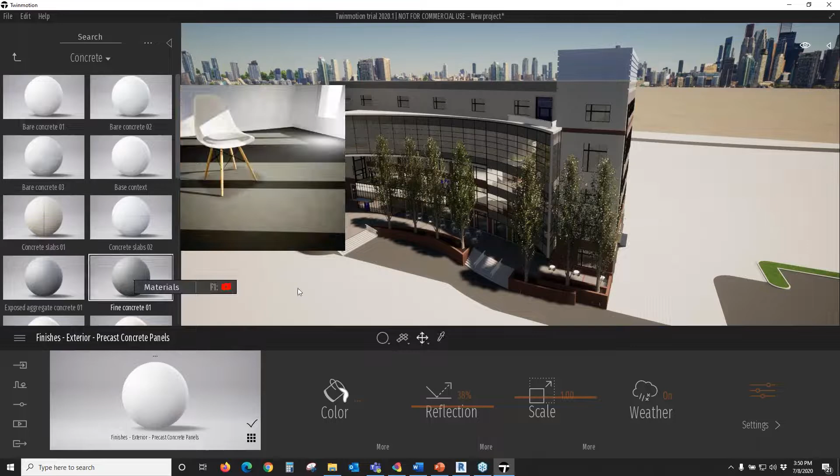Can you touch again on changing materials per instance versus by material type? Sure. If I select this object, there's a command down here called apply to object. So if I wanted to change that material to something else, I can just apply it to that surface, not the whole building, even though it's the same material. It's just a toggle - apply to object or apply to the whole object. By default, when we bring in and replace materials, we have to set up the scene in SketchUp or Revit with materials predefined and organized that way. When we apply it here, it applies the material to all objects of that material type. This lets us get around that - you can isolate a specific object and say I want it to be different. That's one thing I really like about this.

Can you split surfaces? I'm not having to go back to Revit, AutoCAD, or SketchUp to separate out that object so I can apply a different material to it - can I do it here? Sorry, can you split surfaces? I can't - you'd have to physically, yeah, they have to be separated in Revit. You can separate out your model in Revit however you want, do it there, and then bring it in here and I can massage things as needed. But that doesn't seem like too big of a hurdle because you can use the Revit to Twinmotion plugin. Oh yeah, that's what I'm doing right now - just looking at it, going okay, how does that look, if I do this to it what's it going to look like, and you'll know right away. Maybe I do need to separate that out for whatever reason - that's the beauty of doing that in Twinmotion.